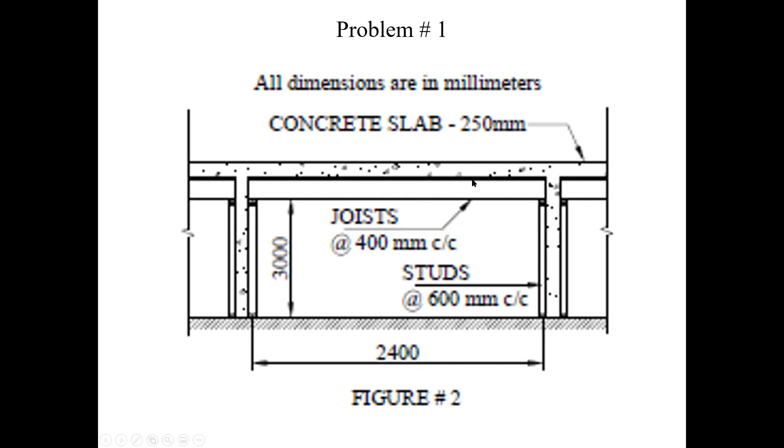Now for figure 2, determine the thickness of the plywood. Use COFI Form Plus plywood. The plywood will be placed perpendicular to the support, and the deflection is limited to L over 270.

Now guys, as far as deflection goes, if there's not going to be importance on the architectural appearance of your formwork, L over 270 seems to be an acceptable deflection. Otherwise, if you think the architect is going to want a nice unundulated surface, stick to L over 360. This way you'll be able to minimize the undulations or deflections caused by your formwork.

Provide the load that the plywood can support. What I'm saying here is that once you go to the table, tell me what it can actually support. Now, the walking load is 3.2 kPa.

This is a pretty good standard walking load that you would have when designing formwork. And like I said, if you're doing something residential where there's only going to be maybe 1 or 2 people on your formwork placing concrete for a small balcony, you can go down to a walking load of 1 kPa. It would still be acceptable.

Now determine the size of the joist and the bearing lengths using SPF number 1, number 2, because that's what joists usually come in. This is the most common grade that you'll find SPF in.

And as far as the studs go, I want you to use 2x4s, okay? You have to determine whether they can support the load based on the spacing shown there at 600 millimeters. If not, how do you modify the spacing? Well, once you know the PR value, you can work backwards and determine what spacing you need so that the PF value is less than your PR value.

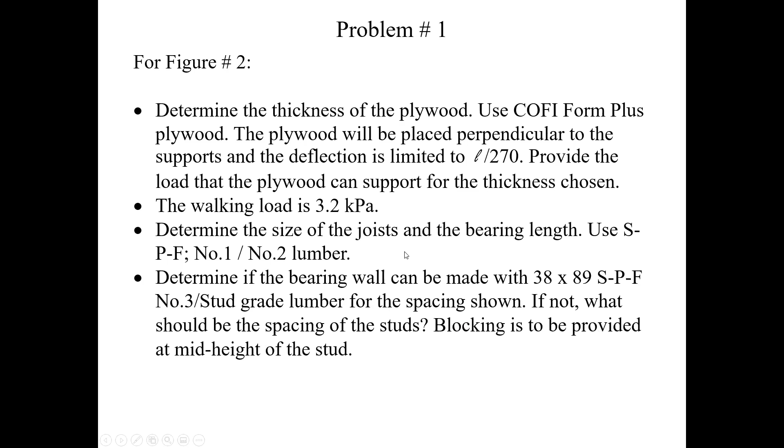Now, load on the plywood. Like I said, when doing plywood, concrete is to be considered a live load. The easiest way to calculate the pressure caused by the concrete is to take the unit weight of concrete, multiply it by the slab thickness, and that gives you the pressure the concrete will impose on your formwork.

And therefore, you take 23.6 times 0.25, I got 5.9 kPa just for the concrete, and I said that the walking load was 3.2. Therefore, I have a total live load that my formwork should be designed for, which is 9.1 kPa.

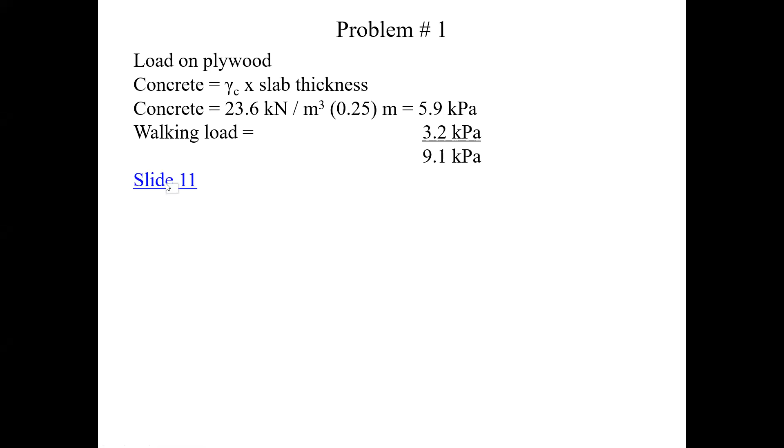So if you see here, plywood must be continuous over 2 supports or more. Supports are supposed to be 38 millimeters wide or larger. The design pressure is a specified load.

So when you come to this table, you use the specified load, not the factored load. A 1.5 live load factor was used to determine these values, so these already take into consideration a factor of safety of 1.5.

So if there happens to be a temporary overload when you're placing the concrete, it should account for that as you're doing it. Now, we said that it was L over 270 perpendicular to the supports, and this was the spacing of our joist.

And therefore we know that even if we use 12.5 millimeters, which to me is half an inch plywood, it would be sufficient to control the deflection that I need and to support the load. And therefore, like I said, contractors are going to typically buy 19 millimeter plywood and use it.

Good plywood, guys, believe it or not, if the guy takes the trouble of oiling it, in other words treating it and this and that, they can be reused up to 50 times.

So that's why they'll buy the 19 millimeter, in other words a 3/4 inch plywood, and use that. But if you know 12 is good, you definitely know that the 19 would be more than ample.

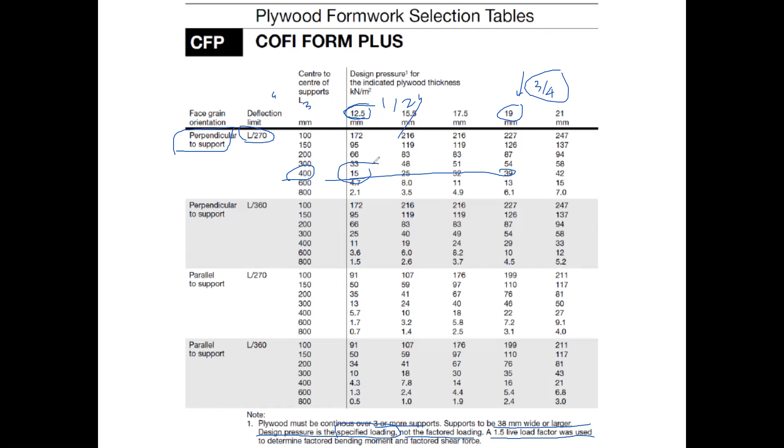So that's the only reason why I'm trying to let you know that what this table tells you is that if the guy decides to use something thicker, not a problem. If he wants to use something thinner, then it's a problem.

So last we viewed, I got 15 kPa, which is greater than my 9.1. Fantastic. Now, as far as the joist design goes, well, now I've got some dead load.

I have the weight of the joist and I have the weight of the plywood, so I have to take that into consideration. So therefore, the dead load for the plywood.

Now, last week, like I said, I was being very generous. I used 0.1 and 0.2. Here, I'm trying to be a little bit more accurate. I went into my wood book and I found that for a 1/2 inch plywood is 0.06 kPa.

And I took a joist spaced at every 300 and 400, and this is what the joist was. So therefore I ended up with 0.2. But if, like I said, if you use 0.10 and 0.2...

So if you overestimate your dead loads, you're not doing yourself any harm in terms of your design. You're only being that much safer. But if you want to be a little bit more accurate, of course, you can go to the dead load tables.

And get values that are a little bit closer to reality. It's up to you. You remember, you're designing, you're going to be responsible for the design at the end of the day. It's up to you how you want it, to what degree of accuracy that you want to make it at.

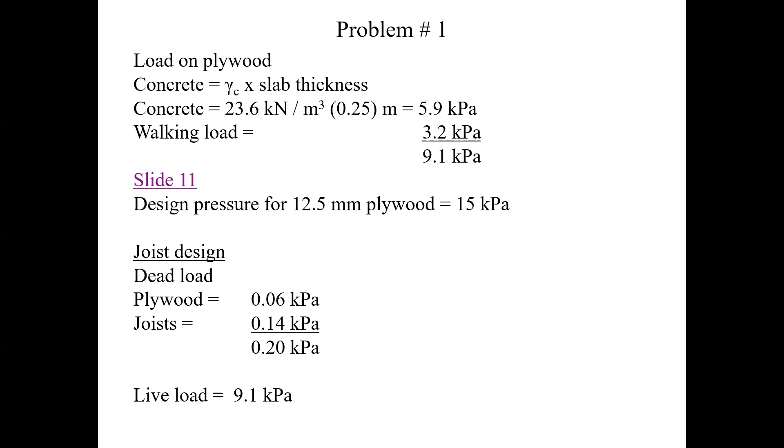And of course, our live load is what we calculated for our plywood. Now, here I know that my dead load is definitely not 10 times greater than my live load. So I will simply calculate the factored load for load combination number 2, whereby I take 1.25 times my dead load, 1.5 times my live load.

Of course, now I've got to factor my loads in order to design my joists. So I get a factored load of 13.9 kPa.

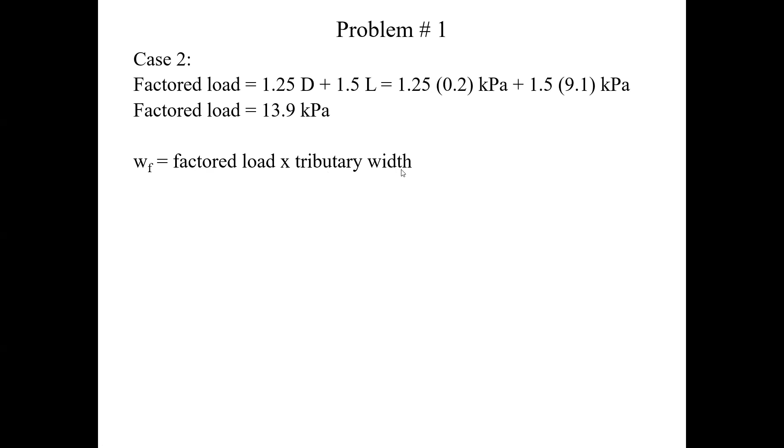And so once I have this, for deflection purposes, okay, I get my WF times my tributary width. And of course, I said that we're going to start with a spacing of 0.4 meters, and therefore WF is 5.56 kilonewtons per meter.

For deflection purposes, I take the live load unfactored of 9.1 times 0.4, and that's what I'm going to use to calculate my deflection criteria. In other words, the stiffness, the EI requirement for my joist. Now I calculate my MF, and like I said, this is basically a joist problem, nothing more than that. VF, and of course my EI.

Since I've limited the deflection for the plywood to L over 270, I will use the same deflection criteria for the joist, because it makes no sense to have the stiffness of one member being higher than the other. So I'll have this one equate to this one and put everything in terms of... I'm sorry, this is wrong, this is for steel.

Sir, if I use 0.3 for dead load, it doesn't make a huge difference there, but would I still be wrong? No. If you use 0.3, you'd be very right, you'd even be more right if it works. Because what you're doing is you're actually overestimating the dead load. And what's good about that is that if the contractor decides to use 3/4 inch plywood instead of 1/2 inch plywood, in other words 19 millimeters, you've already accounted for that in your design. I think that's a smart thing to do. I'm just trying to show you that you can go to the two extremes. You can be over generous, plus the load is not that heavy, or you can be a little bit more accurate.

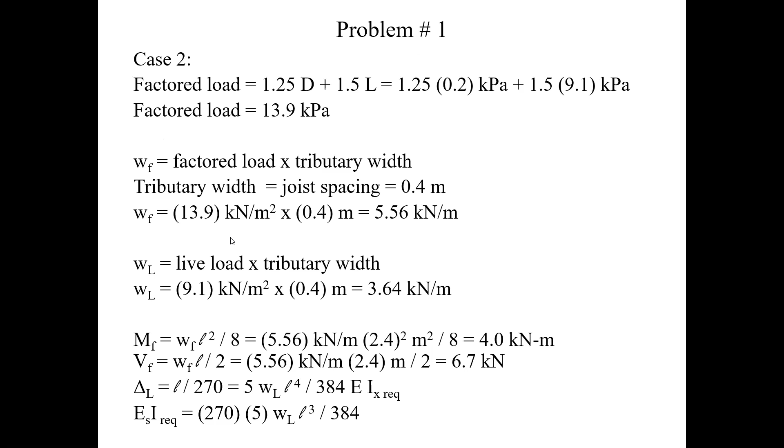Okay, that's it, so now EI required - like I said, this is just a typo here. So now I'm going to calculate the EI required and end up getting 177 times 10 to the 9th Newton millimeter squared. Now, of course, I forgot what my MF value is - oh yeah, I'm not there yet because I'm going to be modifying.

So here I'm going to take advantage of the fact that my KD is not 1 and my KH is not 1, because I'll be looking at the values of single members. And since I know I'm going to have at least 3 members not spaced more than 600 millimeters apart, I can take the KH for case number 1, which gives me a value of 1.1. And since formwork is considered a short-term load, in other words after 7 days, in theory the concrete is going to be supporting itself, it's not going to be permanently supported by my structure, I can take the KD equal to 1.15. Therefore, I'll take advantage of these two factors, which will help me reduce my MF value, and I can go find a slightly smaller MR value in the table.

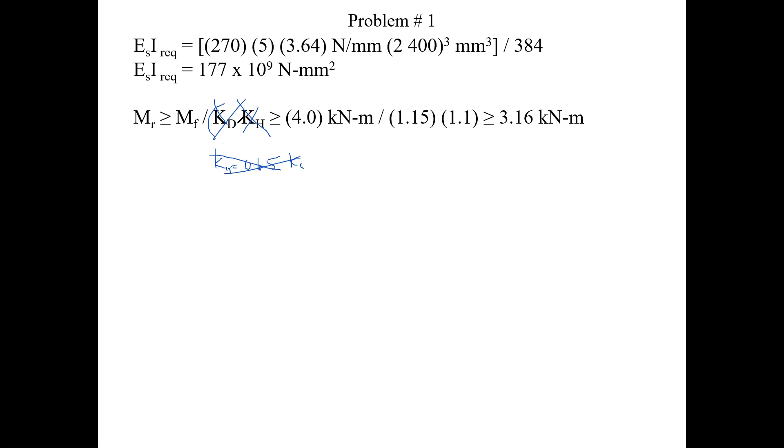So that's where it penalizes you. Now, if you don't do this, you're going to be overestimating your formwork. But where KD is not 1 - in other words where KD is 0.65, and KH is not, where all the values are going to be less than 1 - then you should take advantage. You should make sure you modify them correctly, because with the tables, you should go through that checklist and make sure you fix your values according to the right factors that will be affecting the resistance of your wood.

Now the same thing for VF, and of course for the EI - this is only affected by the moisture content and the treatment factors, therefore that stays the same. I don't have to do anything there.

And therefore now I have 3.16, 5.3, and 177. So when I go to the joist tables, the only thing I have to remember is that I am definitely not here. And that's because even though I got joists and even though I have plywood over it, I don't have the right nailing requirement.

And therefore I will never use these values for formwork. The only thing that stays the same regardless of whether it's a single member, so I never use this for formwork. I always use a single member because of the nailing requirements for case 2. And of course I'm using SPF, number 1, number 2. So I see here that a 38 by 235 gives me 4.09.

So Nicola, you probably had an MR value very, very close to what I got, right? Your MF value is very close to what we got? Exactly, yeah, I got MF equals 4.04. Exactly, so therefore it would still work, right? Yeah, okay, so that's good.

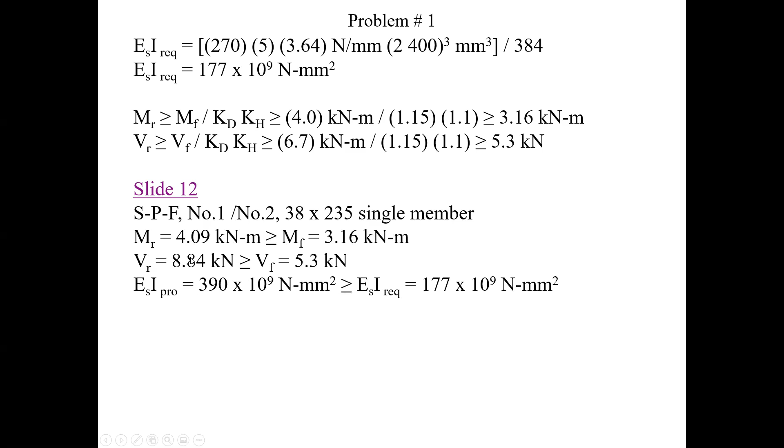And as far as the bearing lengths go, this is where you get the value of Q, the small value of QR. And again, the checklist, if you want, you can take advantage of the fact that you have a load duration that is not standard, and if you want it still applies. And the KD is 1.15, and therefore you can calculate the bearing length.

So here we go. So therefore, I will take advantage of the fact that I have a short-term load, okay? And therefore it will slightly reduce by 15% the LB required down to 36.2.

And of course, if I'm building a wall here that's going to have a top plate with my joists like this, okay, I know I'm going to have 89 here. So if the guy puts the joist all the way back there, the LB provided is definitely going to be more than 36, and I have no problem. The only problem is if the guy decides to sit very close to the edge of the wall, which I don't like because it's going to cause eccentricity for my studs and so on.

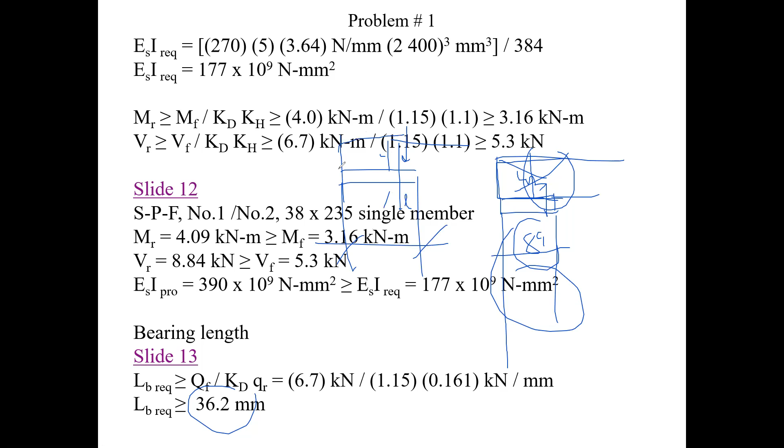So I would tell him, no, I'm sorry, you're going to have to go all the way to the back, so it's not just for the LB. If the guy ever decides to put his stud right at the edge, don't just worry about LB here, also worry about the eccentricity that it causes to your stud. That's even more important than LB. So I would tell them, make sure that the thing is sitting all the way to the back of that wall that's supporting my formwork.

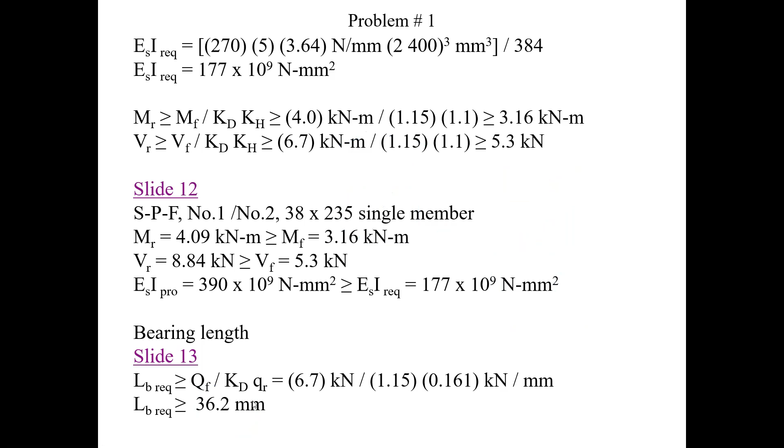Okay, so there is the LB required. So I know that as long as the carpenter who's building the formwork puts his stud all the way to the back of the wall, I'm going to have 89, so it's ample, not a problem. Now, as far as the bearing wall goes, well, here we go.

We have 38 by 89 at every 600. Now the length is 3000, okay, and blocking at mid-height, so therefore the LD is going to be 3,000. The LB will be 1,500 because I'm blocking the B, okay. So therefore this was my factored load.

That doesn't change for the wall. And of course the factored load times the tributary area gives me my PF. So therefore, half the span times the stud spacing is what I have.

I'll write this down so you guys can see it, it's better that you actually see how this is done rather than just worry about it.

Here is my span of 2,400. My joists are running this way and my wall is here, so it stands to reason that half the load goes there, half goes there. Each stud will be supporting a load, so if I calculate the tributary width of each stud, that gives me my tributary area. That's the way you should really be seeing it, and this is how you would write it out so people could understand what you're doing.

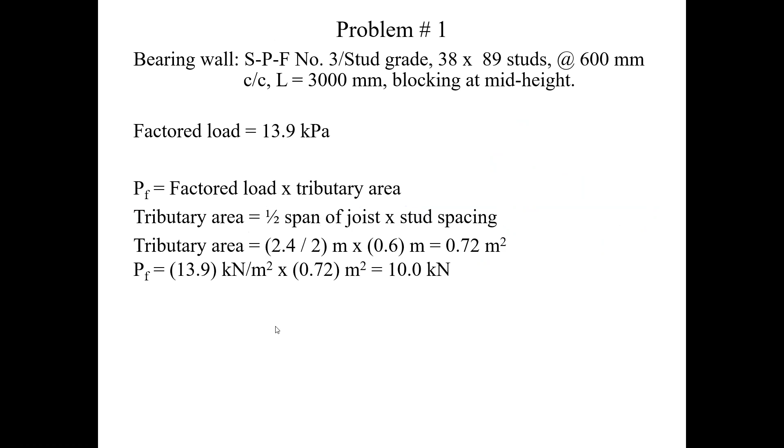So 2.4 divided by 2 times 0.6, giving me 0.72 square meters for each stud. My PF value is 10 kilonewtons, so now I have to make sure my PR will exceed 10 kilonewtons, and of course it won't. But I did that purposely so you guys can start developing a certain understanding.

Now here again, the LD is 3000 because nothing's supporting the D dimension, but we blocked the B dimension, so the LB drops down to 1500. By checking the slenderness, we determine which one is going to govern, and the higher slenderness is the one that governs. Here I have 33.7, here I have 39.5, so the B will govern in this case.

Guys, be careful, this is the limit. If I would not put any blocking here, this value would be twice that, in other words I'd end up with almost 80. That should be a real big red flag that something is wrong. As soon as you exceed that 50, something is definitely wrong. That's why they give you these limits, because after that it is so slender that it almost has absolutely no resistance. Keep this 50 in mind.

So now I know it's the B dimension that governs, not the D, so I'll calculate everything with regards to PRB and not PRD. That's what's nice about checking the slenderness. So I'll use PRB, now phi FCAK.

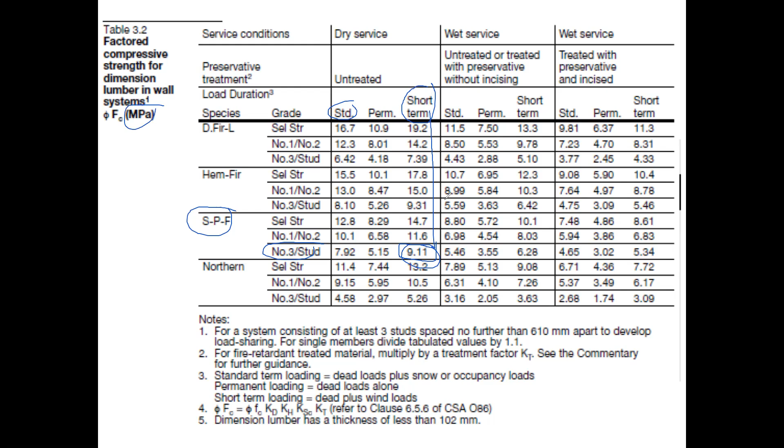So phi FC, this is where I get the value. What I'm going to do when I go to the table is first make sure I'm in the right species, the right grade. But since I'm doing some form work here, I'll take advantage of that and use a slightly higher value of phi FC. If you were doing a floor, you'd use a standard value, but if it has a permanent load, you can adjust. So I'll take advantage of the fact that I am doing short term, and don't forget the units are in MPa, so that's the value I'll use for phi FC.

So 9.11 MPa. Now the area, the cross-sectional area of a 2x4 is 38 by 89. And now the size factor, again you cannot exceed 1.3, that's the limit of the size factor.

So here again, I take the unbraced length with respect to the B dimension, and I end up with a value of 1.52, which I do not use. Since I cannot exceed 1.3, the maximum size factor I can have is 1.3.

I don't know if you guys remember this, but they found that if I take a 2x4 and a 2x12, even if it's the same species, the same grade, and even cut from the same tree, the smaller the member, the more resistance it had. They worked this out through a lot of testing, and that's how they came up with this formula. It's interesting that it's not in proportion - you might think it's just a question of size, but it's not only the size, it's also that the smaller the size, the stronger it gets.

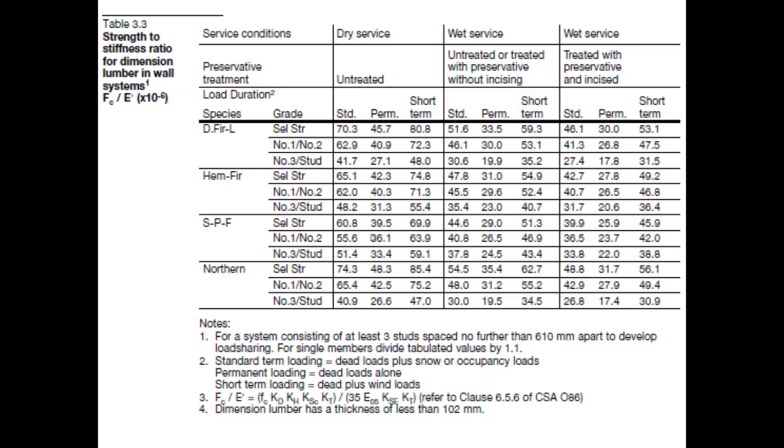Oops, I shouldn't have done that. Of course, now I'm going to get... okay, so I get 59.1. Sorry, I apologize. Now, it's important that you calculate this correctly because it gets used again here in this formula.

So therefore, if you make a mistake here, it's going to get carried over into this formula here. So be very careful about that.

So now, you take all of this. This you've calculated from the very beginning, the slenderness ratio. This is what determined which one governed. This was your slenderness ratio. And of course, your size factor, the ratio of FC over E prime, add it to 1, take the inverse, and hopefully it will be less than 1.

Like I said, 0.174. This seems very reasonable because my slenderness ratio is around 40, and that makes sense to me. I'm pretty sure if we had a slenderness ratio around 50, you'll see that you'll start getting very close to 0.1. And that tells me, yeah, that makes sense. That seems to be a good value.

Guys, if ever you're doing this in real life, do this calculation in your calculator, store it in the memory, redo the calculation, and then subtract the memory. If you get 0, go on. Always do your calculations twice. I still do that to this day. That's good practice, and it's very embarrassing if you make a mistake here, because the mistake just gets carried all the way to the end of your final choices or your final design. So don't ever just do it once.

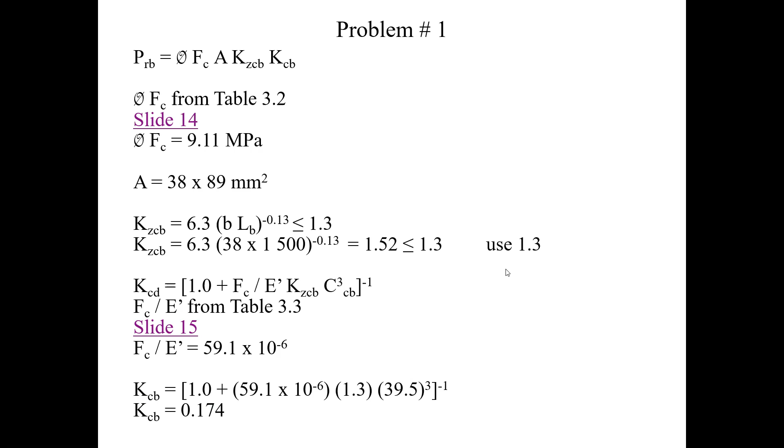So now I've got all my values, and of course I put them into the equation, and then here, this is in MPa, I have to convert this to kilonewtons. Therefore, I basically divide by 1,000.

And I see that my PR value is 6.97, which is no good. So, not a problem. Instead of making bigger studs, why don't I just put them closer together? Now, how much closer? Well, this is just mathematics, okay?

Basically, I know that the PF is a factored load times my tributary area. So all I've got to do is adjust my tributary area. I can't play with the loads, that's fixed. The only thing I can play with is my tributary area, and I can't play with the span. The only thing I can play with is the spacing of my studs, to minimize the tributary area so that the PR value exceeds my PF value.

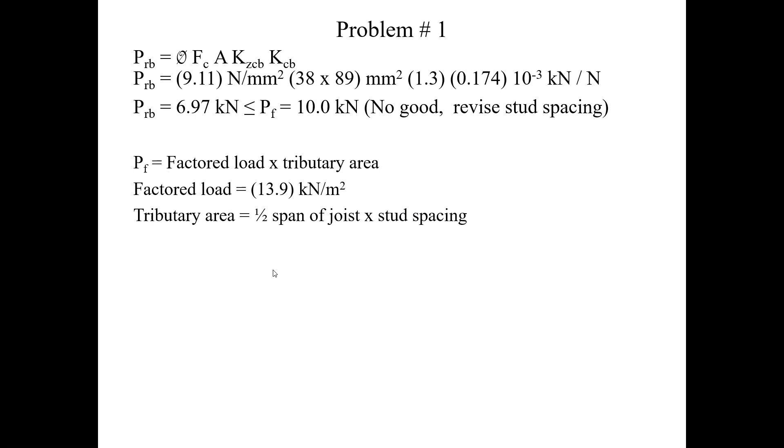So basically, the span stays the same. The stud spacing becomes a variable, and I just want to make sure that when I put it in this equation, the PF value is less than 6.97. As long as it's less than 6.97, it will be correct. And I end up getting 0.4 meters.

And of course, I can specify 0.4 meters, but why do that when you can specify 16 inches, and space them at every 400? If I put my spacing at 400, I'll get a PF value a little bit less than 6.97. And therefore I tell the carpenters, put the studs at every 16 inches on center. It should be okay, as long as they put the blocking at mid-height to laterally support the stud.

Guys, when you're doing formwork, keep in mind whatever you're putting at the bottom here, okay? If you want to refer to that, this is called a mud plate. Because it's basically usually sitting in the mud, and it's a plate that helps to support. So if you're ever referring to that bottom piece, it's called a mud plate. That's what they refer to it as in formwork.

And that's it. So now you know that you're good to go. And as long as you can do that, that's it. So does anybody have any questions?

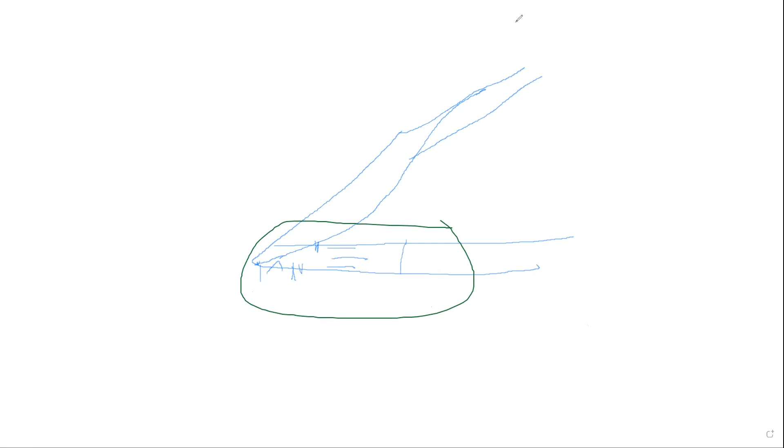But if you're gonna do it with AutoCAD, I think last week I actually very quickly drew the truss, and then I came up and was able to determine this, right? What I said was, you know, with AutoCAD, the nice thing is it does all the calculations for you. You just have to give it the command.

So for example, if I take this member here, I'm going to put it up here so we can all see it. Let me clear this. So with AutoCAD, what you can do, okay, I'm going to change color so you can see this. So with AutoCAD, what I would do is I would draw a line here.

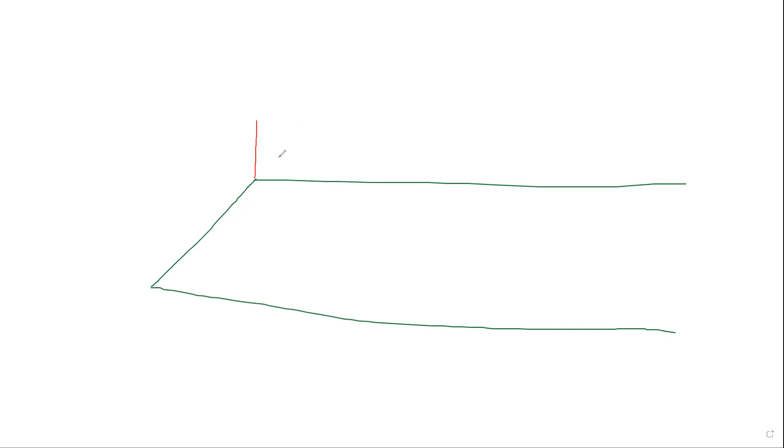Okay Ryan, and then just to make it easy, I'd make sure the line touches here. I know that it has to have a perpendicular distance of 40 millimeters. It's 39 minimum, but 40. So what I would do with AutoCAD is draw a line here and say offset, take the offset command.

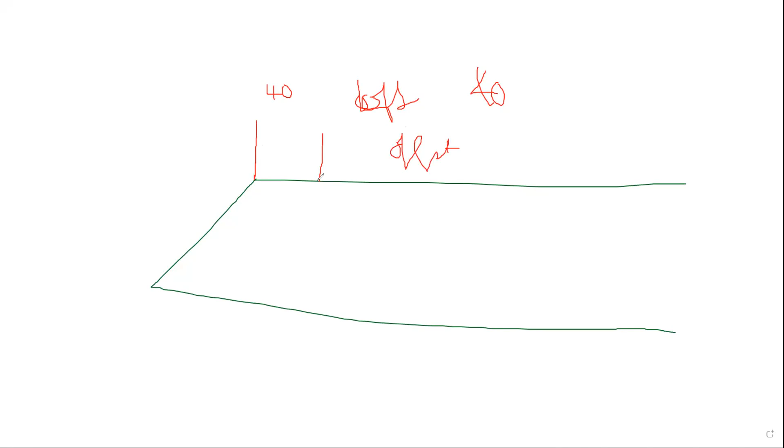Offset, and then I would say 40 millimeters. And then I would pick this and point here and AutoCAD would put it there. Then with AutoCAD, what I would do is say offset, and now I wouldn't give it a distance, I would say through.

With AutoCAD, you can actually pick a point and it will go through that point. So you would pick this line here, and then pick this endpoint, and AutoCAD will put it right there for you. Because if you say 40 millimeters, it's going to offset 40 millimeters perpendicular like this instead of 40 millimeters perpendicular like that. You follow what I'm saying?

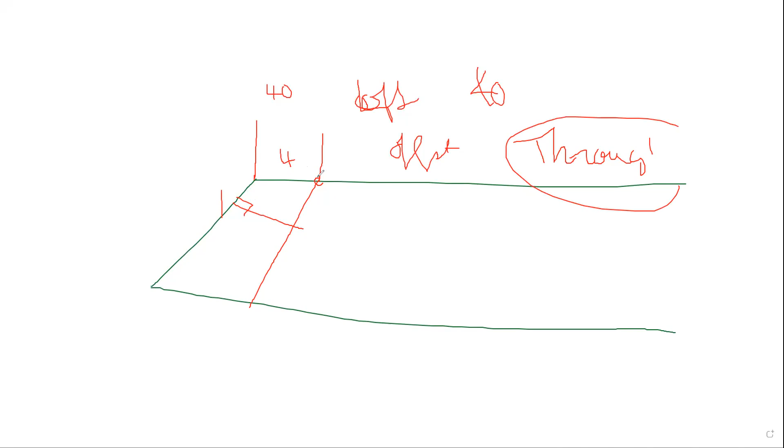Yeah, so by saying through, AutoCAD will go through that point. Now, what you can do is then after that, you take this and offset it. I think we said we should leave 60 after that, right? So then you can offset this to 60 here, okay?

So you're always going to make this, and then after that you can do another through, you understand? And then, like if you saw what I did last week, once I got this point here, I said copy, copy this, start with this point here and go to that point there, go to that point there, and I was able to just keep copying those all the way across until I ended up with the number of spaces I needed.

You understand? Did you record that last week? I think so, but if you want, we can do it again. No, it's okay, you can just look at the video. So the thing is, Rena, for me, AutoCAD is a great tool.

You understand? I like to use that tool and try to maximize how I can get the most out of it. If you didn't realize that you could use this through command with AutoCAD, you would never have thought of that. You know what I mean?

So the same thing here, for example, well here we don't have to do it, but for example this one. Once you determine how many times you have to repeat this pattern in order to get the number of nails you want, with AutoCAD I would just ask it for that distance, and then bring it up to a multiple of 10. That would be the size of my gusset plate.

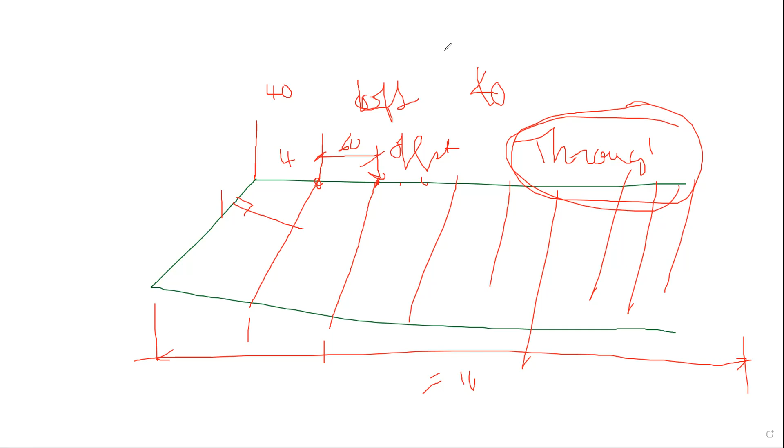If you're there, that means you're pretty well finished your project, which is great. There's only 2 weeks left. I don't know if you guys noticed, but I put the project on the assignment sheet. Keep in mind that if it doesn't come in by the time I have on that sheet, you will lose 50%. That means you fail the project, because if you lose 50%, you're at 50%, you don't even have 60, so you failed.

We also send our AutoCAD file in the same, but through LEA, you understand, because I want to keep the PDF in one folder. I want to keep all your drawings. First of all, you're only going to have hopefully one AutoCAD file, because you're just going to copy and put everything on one sheet, like I showed you. So I'm basically going to be getting one AutoCAD drawing from you guys.

Anton, go ahead. Yes sir, I have a question. Since the last exam we did built-up columns, bearing wall, and lintels. So for this exam we only have nails and formworks? Isn't that nice? Perfect, I just wanted to clarify that.

Hold on, let me just see if I have... yeah, as a matter of fact, yeah. If you want, I can send you the exam the day before. How's that? Does that sound good? Are you joking? Of course I'm joking, because the day before is a strike, I'm not allowed to do it. So now you know why I'm saying that, because it's a strike. I'm just kidding.

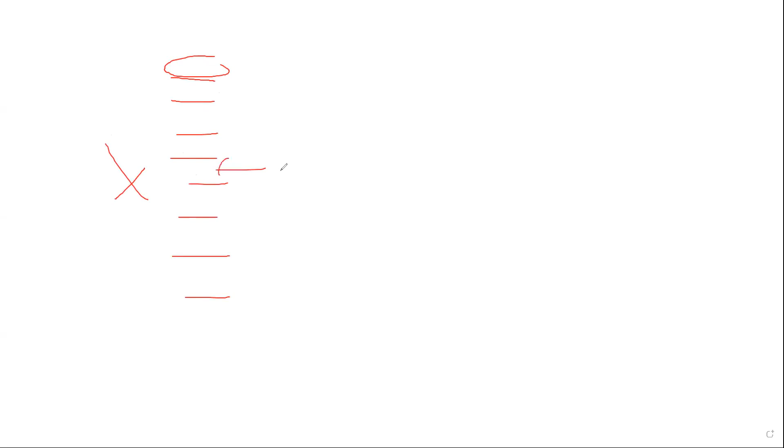Okay, so that's clear for everybody. Make sure that it's in the order that I specify on that sheet, because I don't want to have to go look for information. If I expect the information to be there and it's not, I will start deducting marks. If I find it somewhere else, I will disregard it and still deduct that mark from your project.

I shouldn't need a roadmap to discover where to look for the information. The design brief follows the chronological order as if you were actually designing the project, and I expect the calculations to be in the same order. At the very end, once all your calculations are done, I should be able to find all your drawings, and those should also be in sequential order.

Those of you that have been keeping up on a week-to-week basis, this is when you're going to appreciate the fact that you put in the time way back when, because this is where it pays off - the last 2 weeks are horrendous. I don't know if you guys are feeling the crunch right now, because that's the biggest complaint I hear every winter.

I've been keeping up and I'm still stressed. At least you're a little less stressed than if you wouldn't have been keeping up. Trust me. I believe I've had people drop the course because they couldn't finish the project. That's unfortunate, coming so far yet so far again.

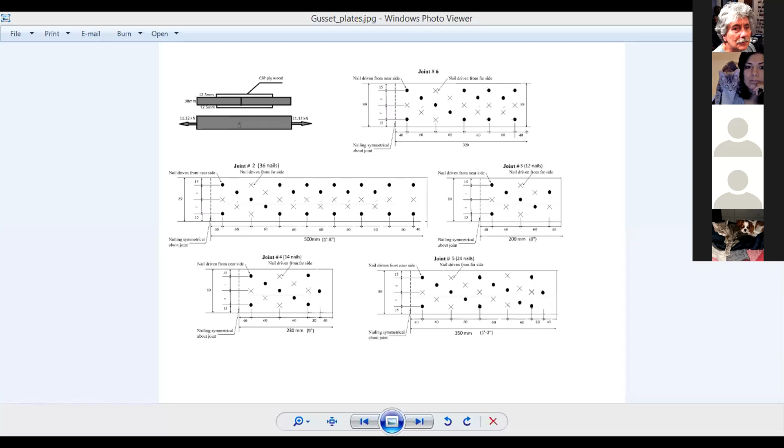Did you do it on AutoCAD? Not really, I haven't gotten this far with AutoCAD, I just made the design here. You're going through all that trouble? Yeah, why?

No, just for me, the thing is, the gusset plate, it's fine showing here, but when I try to picture it on the truss itself I'm not sure how it's done. I'll give you an example, I have the same problem. That's why I did almost the same thing as you did, and I had the same problem.

All I want to see on your drawings, for example, you've determined here you need 500 millimeters. Is that it? Yeah, 1 foot 8, for 36 nails. So if you're doing your drawings in imperial, all I want you to do is show me that the length of that gusset plate is 3 feet. 8 and 8 is 16, 3 feet 4 inches, that's it.

You understand? If we look, I haven't opened up a drawing, but why is it going to be 3 feet? Well, because you're saying that half the gusset plate is 1 foot 8 inches. If you take the full length of the gusset plate, it would be twice that.

Okay, yeah, but this is for joint 2, that's the part I'm not getting actually. This is for joint 2. I wish I had... this is joint number 3 that you worked this out. Which sheet? In other words, this was for joint number 3, right, that you worked out the spacing here, is that it?

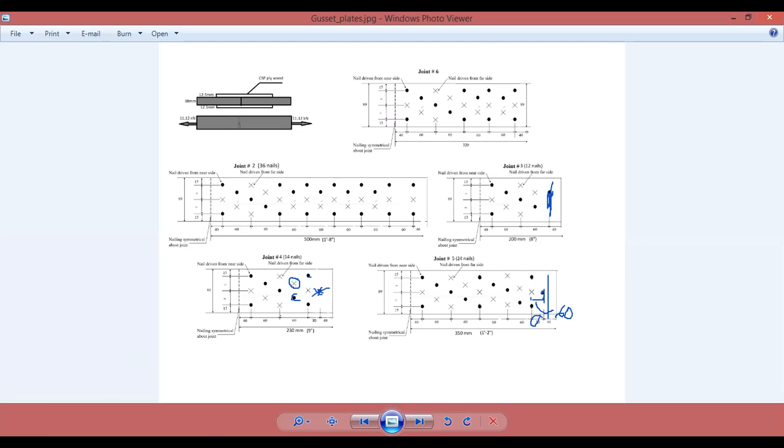Understand? So all I'm saying is right now you've got 9 inches here — I would say that becomes 10 inches. That's all I'm saying, because you cannot do this, you're not allowed putting 2 nails in line. Do you understand? The C distance is this, Norman. This is that A distance we were talking about. Now if you maintain that distance, you're allowed to stagger in between, but they're not in line. That's what they mean by staggering.

See, the distance between this one and this one is more than 52. The distance between the staggered nails, you're still maintaining that minimum A distance.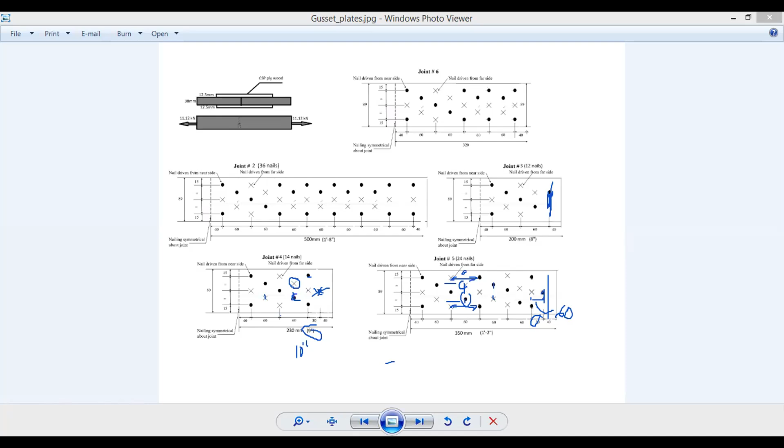I don't know if you understand what I'm saying. No, I do understand, but I thought as long as the problem... I thought I was very clear on that. You have to understand the whole concept of what A, B, C, D stands for - it's the direction of the grain and where the nails are with respect to that grain.

Okay, so this nail here, and this nail here - did somebody erase my thing? Can you see me draw 2 circles here? How come they keep... I'm trying to. No, we can't see it full. Okay, I can reopen it if you want. So you're gonna share? Well, I can go get the drawing. It's gonna take a while, but I can go find it.

So you worked out all the distances, right? Like I said, there's a little glitch, but don't worry about that, Nermin. You understand?

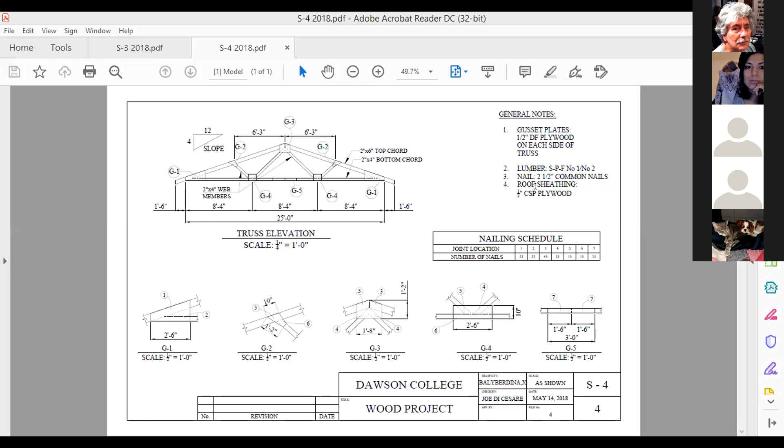Are you sharing your drawing? There, right now. Okay, here it is. So what you're saying, can I annotate? Let me annotate, okay?

I'm annotating now. So on what you showed me before, what was the distance you had here? It was 500 milli, so... give it to me - it's 1 foot 8 inches. And how many nails did you put in there? 36. Okay, so you calculated 1 foot 8 inches from there to there.

You understand? Okay, so what you're going to do is on your drawing, you're gonna offset 1 foot 8 inches, and then measure from there to there and round it off to the closest inch. Okay, for this joint I get it. And now the joint - as you call it the bottom - let's look at joint number 3.

This is joint number 3 here. Okay, Nermin, that's joint number 3. According to your calculation, what was the distance that you needed to put the number of nails?

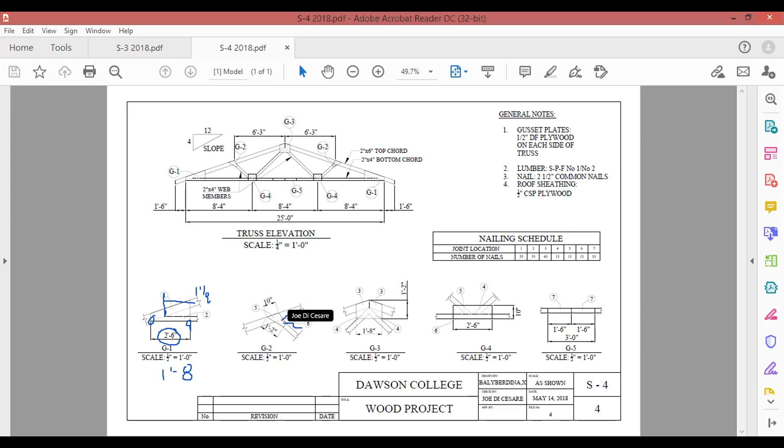12. Yeah, it was 12 nails, but it's coming to 8 inches. So what you're saying is that from this point here to that, you draw a line and offset it 8 inches, and that would give you that line there. You understand? Then you can determine the size of your gusset plate.

So you've already worked out your dimensions, Nermin. You understand? Okay, my problem - let me blow this up for you.

See, you drew it straight like this, and you worked out your nails. You understand? Now I'm going to take this member here, and draw it with the same angle that it's supposed to be in the truss.

You understand? So what you did, you calculated if it was straight from here, and you needed 8 inches to put all those nails. So you're saying that from that point there to that point there, you need 8 inches. You understand? And then you draw a line perpendicular to that, and you'll be able to dimension what that is.

Okay, now my problem - let's go. I'm just showing you how easy this is. Now you've worked out the hardest part. You understand? Now you're just going to take AutoCAD and simplify your life.

Now up here, what joint was this? It was... these are joint 4. Okay, so on your joint 4, what distance did you calculate to put all the nails that you needed? I have 9 inches. Okay, let me blow this up here.

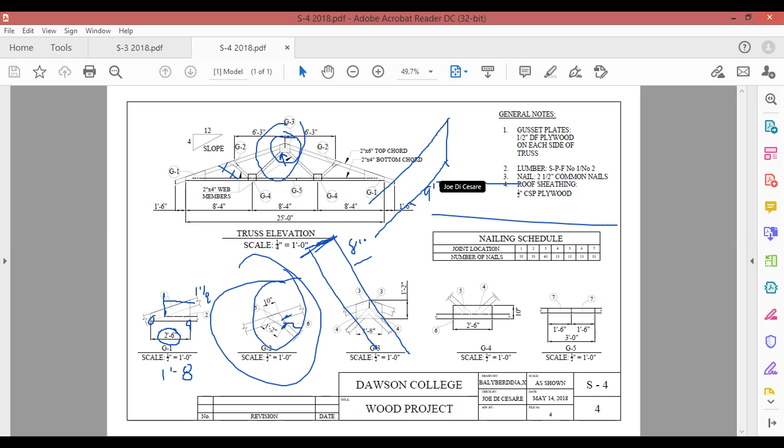Yeah, okay, so on your AutoCAD drawing, you take a line here, you offset it 9 inches, and then you just draw a nice straight line, and you go up, and you've got your gusset plate. My God, you've got all the information right there.

So I'm gonna, you understand? Like you're drawing everything straight like this, and you're calculating what space you need, right? Well, then when you get to your drawing, this is the straight part.

You understand, that you have on the other drawing? That's why I wanted to show you. If you could have left both drawings, I could show you how you relate that to that. I don't know how to put both of them next to each other.

Well, you press the... do you have a Microsoft key on your keyboard? Are you using Windows 10? Do you have a Microsoft key on your keyboard? This one - this is an ancient laptop that I have. Oh, it's a laptop, okay. So okay, no, okay, you're using a laptop.

Okay, but you understand, Nermin, what you've done is that you've worked out, for example, even this looks like this one here - this looks like it's like this. You understand, it goes like this, it goes like that. What you did is you put everything straight like this, and you worked out what the spacing was, right?

So when you come to this joint here, you would be starting from here, and then you would go and offset that way, and that would be the straight distance that you worked out, and then you just let AutoCAD do the rest of the calculations for you.

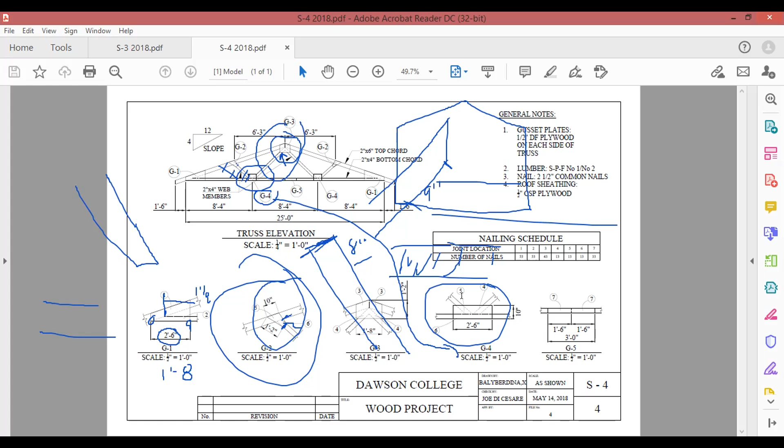Yeah, pardon? I saw the lab, I was there for last lab when you did the first drawing and how you designed it. So what I'm saying is that for this joint here, right?

Can I clear the drawing? Okay, so let me show you, let me show you on my whiteboard how I would, based on the information that you have - you want me to stop there? I'm going to show you on the whiteboard how I would do it once you have that information. Okay, so let me show you.

So if I was in AutoCAD right now, okay, this is the bottom chord here, right? And I don't remember exactly, did you put the members this way for the bottom chord? Is that how you did it? Yeah, yeah. Okay, so look, I'm going to change color so you can see what you're doing.

Okay, I just change color, I'll do it in blue. Okay, so right now, what you did is that you took a straight piece of wood like this, right? And you calculated, for example, my edge distance here, and you calculated how far I would need to have all those nails in that space.

You understand what you did? Yeah, yeah, of course. That's what you did. And then you said that for this joint here, you had 9 inches - is that what you had?

Yeah, okay, so what you're saying is that from here, okay, if I take the same straight piece of wood, just in your mind, superimpose it like this - isn't that what you're doing?

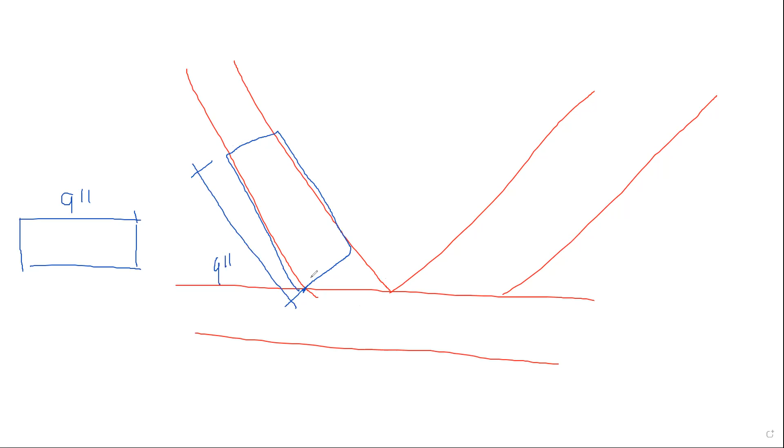Yes. So if this is the case, what I would do is with my gusset plate, I would go down straight, make that at an angle there, go straight, make that at an angle, and make it go straight. Isn't that a nicer gusset plate?

Yeah, absolutely. Of course it's gonna be like that because the next drawing you've worked out the worst part. With that information that you had, if you were in your AutoCAD drawing, it would take you about 2 minutes and you'd have all the sizes of your gusset plates.

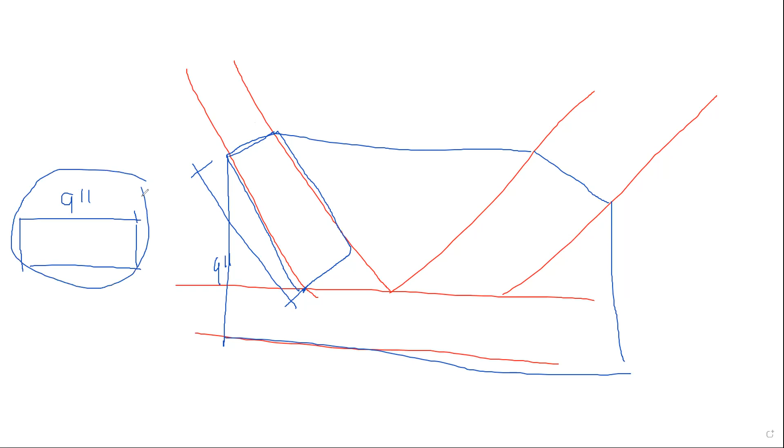Okay, so you got what I'm saying? Like what you did here, just in your mind, superimpose it on the member as if it's straight, and then from there work out how you're gonna make sure that you maintain whatever you worked out there.

Do our gusset plates have to be like this? What's your question? If the gusset plates have to have this shape in particular, because I was looking on the internet and there were different shapes for gusset plates.

Rena, there's not one right answer. What's wrong is if there's not enough space in here to put the nails. Okay, understand? So if you want to make this pointy, or cut this at an angle, it's up to you. But what's wrong is if there's not enough space here to put the nails. That would be wrong.

Here there would be ample space, trust me. By the time you do this, there would be ample room to put the nails you need, from here to here. I'm pretty sure this will be ample space to put the nails needed from that one and that one. But this, to me, is a very nice, clean gusset plate.

See what she did is she worked all her spacing based on the members being straight. I'm just trying to show her how you take that straight member and superimpose it here, and then take whatever you worked out there and do the rest on AutoCAD, letting AutoCAD give you the dimensions. You understand?

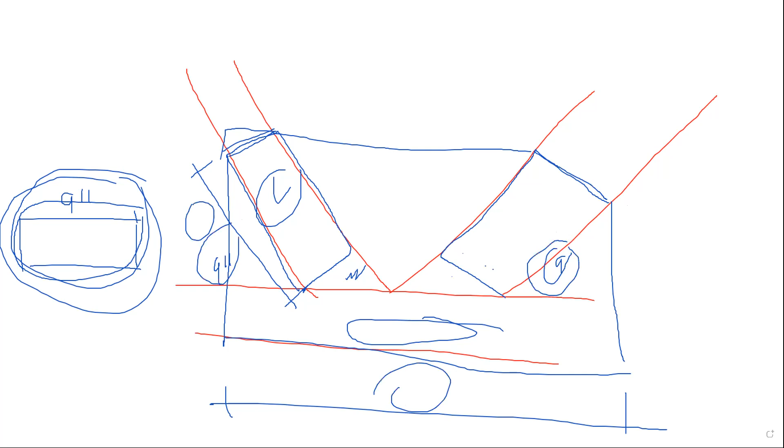So that's what I'm saying. If you don't do it on paper, you put your nails, do the offset, and then find out where it goes, and you can draw it on AutoCAD. But she's already done this manually, so she already knows what these dimensions have to be. So I'm glad it's clearer now, Nermin, you understand?

Yeah, thank you so much. Okay, so you were just having trouble relating how I'm doing everything straight, and how to relate it to something that's at an angle, right?

Yeah, especially when you have, for the bottom one, three different joints at the same point. So I wasn't sure how to put the whole thing in one. I superimposed a straight one right on my truss drawing, and from there I simply draw out my gusset plate.

You understand? Yeah, yeah, and you worked out the worst part. You know, that's it. So, okay, but it's fun. It's nice, fun, right? It's fun when you get it. Okay, so that's it, there you go.

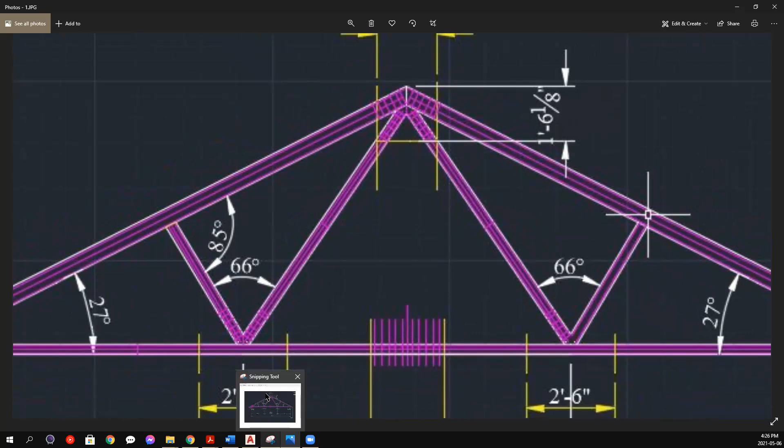Number one, let me annotate. Now Omar, if you understand what that diagram is saying, you'll understand how to relate it to your AutoCAD drawing. So for example, now I'm going to go back to the table. On that table, you had dimension A, dimension B, dimension C, dimension D.

Now, in that table, the A dimension referred to the spacing of your nails parallel to the grain. You understand? So if this is my 2x4 here, and my grain is definitely going like this, okay?

If I put a nail there, and I put another one parallel to it, I have to maintain that distance of, well, 52, but we're using 60. Do you understand?

So what I'm saying is that now with AutoCAD, what you do is if I determine that line here and I offset it, it's going to be exactly 60. So I'm respecting the A. You understand?

But that's what I want you to understand, like in AutoCAD, when you offset 60 millimeters, what you're doing is respecting that 52 millimeters when the two nails are in the same row.

I understand, oh okay, I see that. Okay, but my problem is I cannot, I'm right at the bottom here, I can't get a perpendicular line like to start with to offset it.

You can, I'll show you, like for one example here, second, let me share.

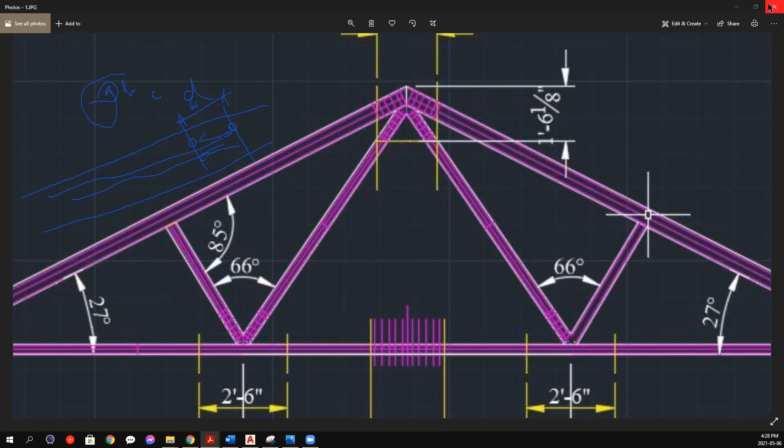Share me your AutoCAD drawing. Let me open it, one second. Can I share mine? Well, share, I don't care as long as I have an AutoCAD. Because if I open up my AutoCAD drawing, we'll probably take about 50 seconds.

Okay, so now I'm going to have to ask for a remote request. Okay, there. Do you see my cursor moving? Yeah, I see it. Okay, so Omar, first of all, let me zoom in and let me pan over.

Okay, now I don't know why your lines aren't touching here, but... this is my draft, so I haven't fixed that. Okay, because what I wanted to do is show, so we're, for example, extend.

Okay, so Omar, you want to see how you draw a line perpendicular? You say line, you start from that point there, and then you go. Make sure the O-snaps are on, and make sure the perpendicular is on.

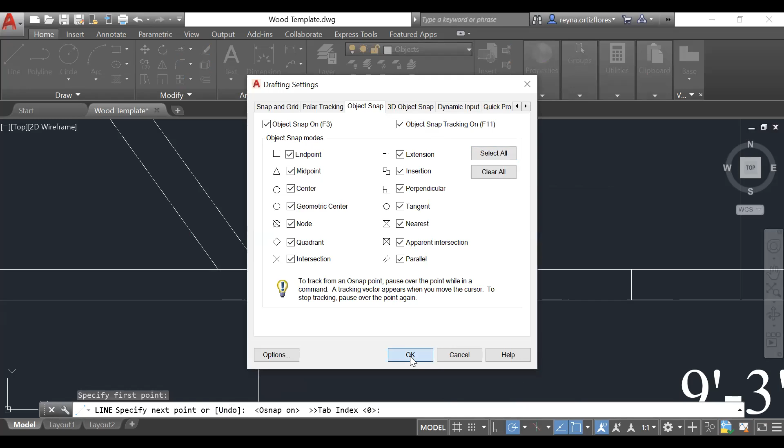Select all, this is the first thing you guys do, make sure all your O-snaps are on. I don't know how you guys work without this. I didn't even know that existed, there's perpendicular, Omar.

And now I say offset 40 for my edge distance, right? Sir, it's not, this is inches. Oh yeah, it's true, okay so in other words it's 40. Well, 40 divided by... okay, so this is inches.

You're right, so in other words, write 40 inches and it will do it? No, because this is in inches and I'm doing millimeters. 40 divided by 25.4 equals 1.57. Okay, so offset 1.57. Okay, so yeah, thank you for reminding me about that, Omar.

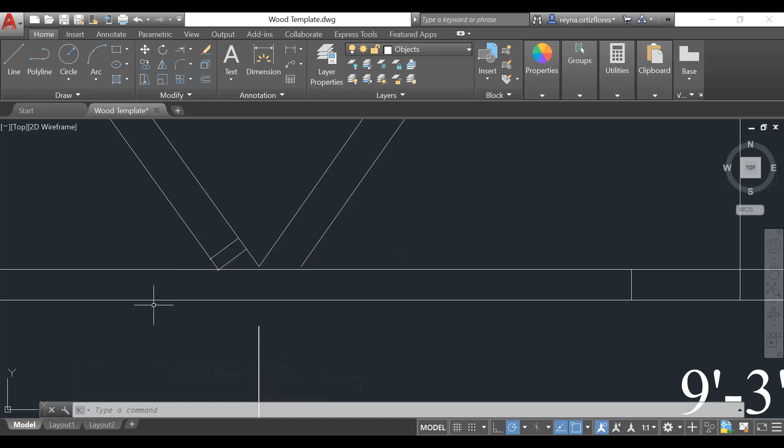So there's your edge distance, and then the other one we said was 60, right? 60 divided by 25.4 equals 2.36. So offset 2.36, and then, okay.

So Omar, you see how you get your perpendicular distances? And then you keep going. Like I have 3 nails, and then here I have 5 nails, so I'm at 8, 13, and you keep going until you reach the number of nails you need, and then you offset another 40 millimeters. You understand? And that's going to be the size of your gusset plate.

Wait, sir, can you just redo that step? Where did you connect? Where did you start off from? The corner? I started right here, where I need a minimum end distance of 40 millimeters. Yeah, exactly. And then what I did, I took 40 millimeters divided by 25.4. 40 divided by 25.4, because this is in inches, it's 1.57. So then I did offset 1.57, that's 40 millimeters. Then it's supposed to be 60 millimeters.

So then I understand. And then, because the problem is my truss doesn't come down all the way to the member like that. Why not? If I can annotate here, these two don't touch the bottom over here. Why not? Because I followed the video and they come down like this, and there's a space between here. These come down like this though for sure.

So in other words, what you're saying is that it makes no difference, Adriano, whether you want to draw them like this, okay, or you want to draw them mitered. It's the same thing. I take them both to be correct. Don't get me wrong, okay?

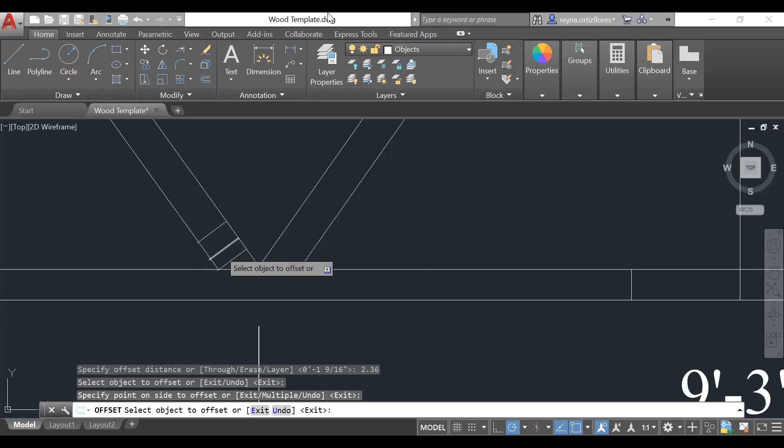So now, let me annotate here, okay? So like in your case, what you're saying is that you have one member coming like this, it's mitered, and it goes like this, and then the other one goes like that, right? Do you agree? Is that what you're saying? Or I'm sorry, no, I drew the mirror. Sorry, let me. No, I was getting confused because I think I made a mistake on one of the truss. That's why the perpendicular doesn't. What you're saying is that, like, in your case, you have.

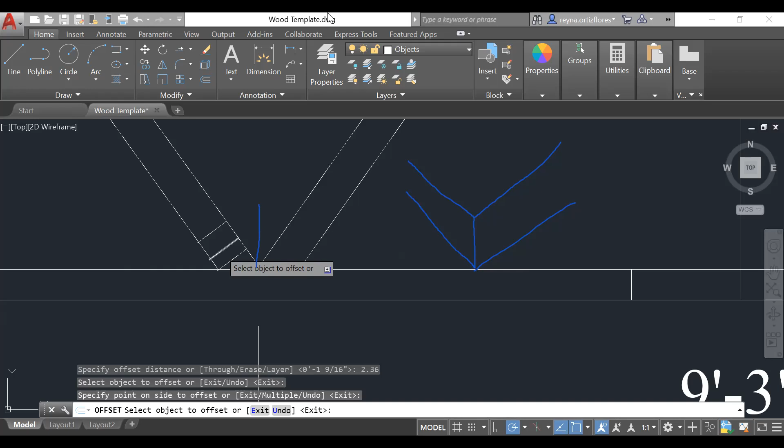Sir, can I share my screen and show you what he means? Yeah, go ahead. Please, Reyna. Let's clear this drawing here. Okay, show me. Here we go.

Okay, so what you have to worry about is where is the closest end distance? Okay, exactly, sir. So like, let me just annotate 2 seconds.

I just want to tell you, I don't have these two members here coming down all the way. Okay, how do you have them? Like exactly like this. I did them like this. It doesn't matter, he said doesn't matter. Like he doesn't have them. Oh, you mean like you didn't miter them. You left them straight, right?

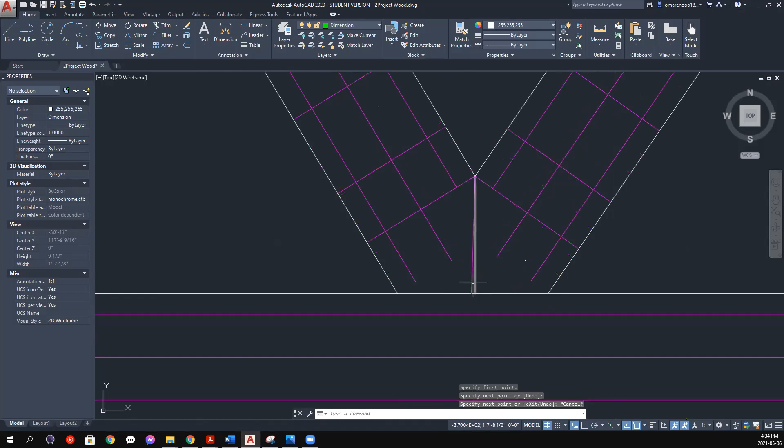Exactly. You're allowed to do both. You don't have to miter them, you can do both. In other words, some people like to miter their joints, and some people just leave the wood straight. It doesn't matter, Adriano. Okay, I got it now. They're both correct, you understand? It's the both way correct. The drawing's different - some people will miter the joints and put them all together, and other people will just leave them at 90 degrees. Okay, quick, so that's why we won't have a 90-degree angle because we.

In other words, what you're saying is that you left yours straight like that, right? No, it's exactly the same way like Omar has it right now. Exactly like this. I have it. Okay, so I thought it was wrong or something. Okay, never mind then, it's like I said. Oops, sorry.

I think some people miter the joints on the trusses, and some people leave the lumber coming at 90 degrees. They're both correct. But does it matter in the future? Which one is better to do? Well, mitering is a little bit better, but it takes more work.

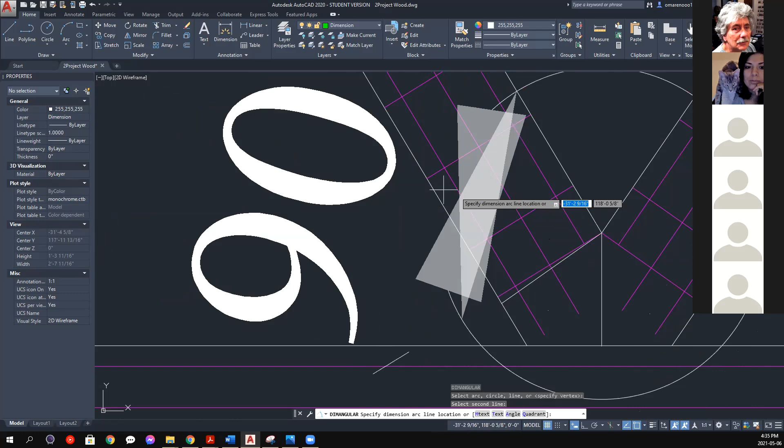The other way has to cut for sure right angles, yeah for sure. So mitering is a little bit better, this way you're not relying totally on the gusset plate. Sometimes when they butt together, they might help each other transfer some of the stuff. But the reason why they don't miter them is because sometimes the guy can't even calculate the angle. You have to calculate the angle to miter those things together. Mind you, with AutoCAD, you can have AutoCAD give you the angle.

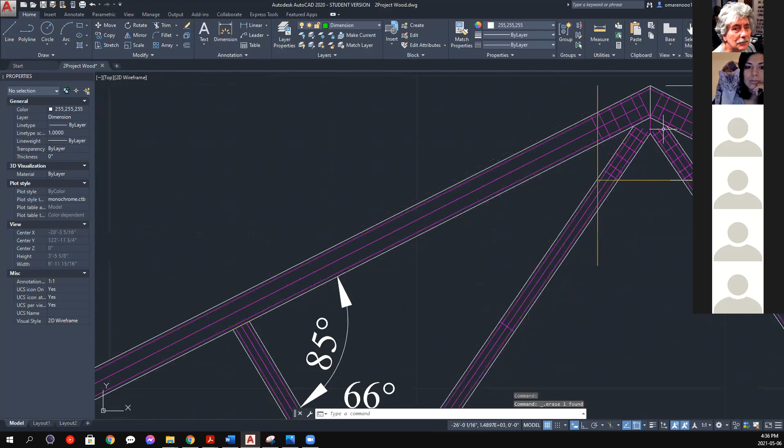So Omar, do you understand how you draw a line perpendicular to whatever it is? So you take the closest edge distance, you draw a line perpendicular to the other side, and bang, off you go. No, I have them, I just was making sure.

Okay, and one other thing, when we start here, perfect. You see here's one of your end distances, can you see my pointer here? No, see, okay, where is it? Because I have to share, you have to request remote control. Okay, approve, go ahead. Okay, you're gonna have to zoom in. See here? Oh sorry, let me go back, I want to pan down.

See here, this is perfect. You started here, you drew a line perpendicular, and then you got your end distance, then you got your distance in for your A value. Perfect, you understand? Don't even worry what happens in here, who cares, you understand? Okay, you follow what I'm saying? This gusset plate would be the minimum. I can extend it a little bit just to make sure.

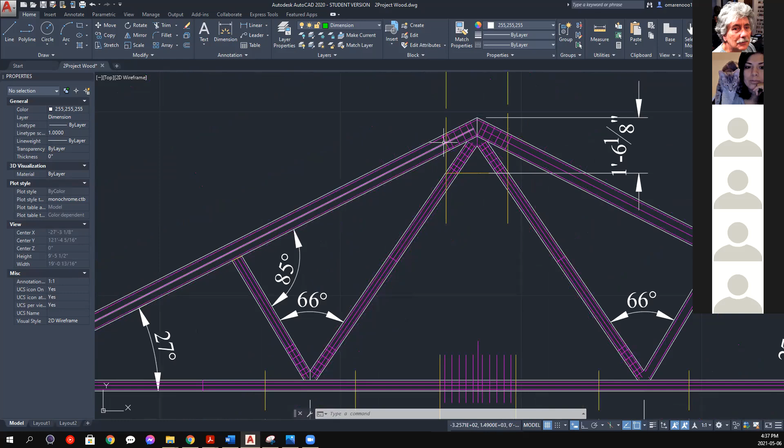Well, if I come to what you're doing now, right? Now I'm gonna draw over it, okay. So if you want to get really nice, Omar, be creative. Hold on, what I mean by creative, where's the annotate?

So what you're saying is that this is the edge distance, to keep that from there to there, right? You understand, you follow what I'm saying? From here to here is your edge distance, from there to there, from the last nail you're going to be putting here in your joint.

Agreed? So here, once you make a gusset plate like this, go straight up, go like this, do the same thing on the other side, go straight across, and isn't that a nice gusset plate? I mean, okay, it would be nice here, but when they actually go cut it, the guy, when they cut it, it's gonna be harder for them.

Anyways, yeah, okay, that makes sense. So what you're saying, it would be easier for the guy just to do this. That's what you're saying, right? Exactly, do it exactly like that. Omar, they're both good, you understand? As a matter of fact, you're right, this would be a little bit easier for the guy to do it. So do it this way.

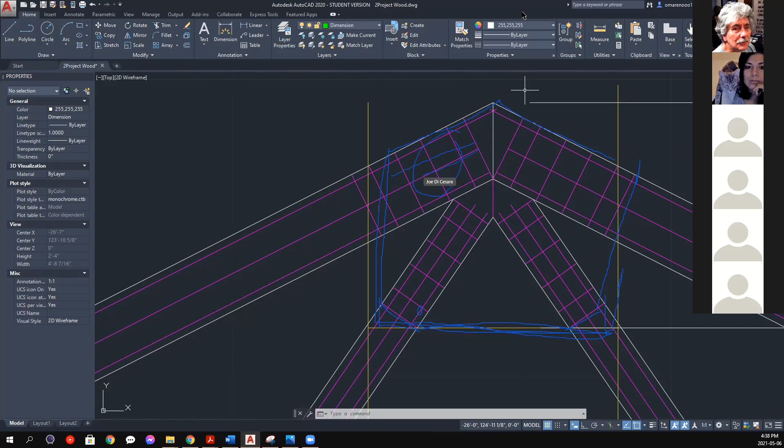That's good, you understand? Now up here, don't forget you have 2x6s, so there's a lot of rows you can put in here for the number of nails that you need. You understand? So I don't have to do... okay, do you understand? Because here you have a 2x6, you don't have a 2x4, so there's a lot of space up here. So I can add an extra row, so I don't have to go...

Exactly, okay, you understand? Because look, we said we needed 13, this is always going to be the minimum, right? 13, 13 for the edge distance, 26 in between, right? Remember, perpendicular to the grain, we need 26, we need 13 for the edge distance, right? So for example, if I have 1, 2...

Sorry, don't worry, here, I'm gonna go to my whiteboard so you guys can understand what I'm saying. Okay, I'm gonna drop out, yeah okay, so that's it. So for the top chord, you guys have all this liberty, you understand? Sorry, let me go to the whiteboard, and we'll do the math right now.

And I'm sure you can put 4 rows. Okay, so here's my 2x6 like this, right? Well that's 140 millimeters, right? If I have to leave 13 there and 13 there, right? So 140 minus 26, how much is that?

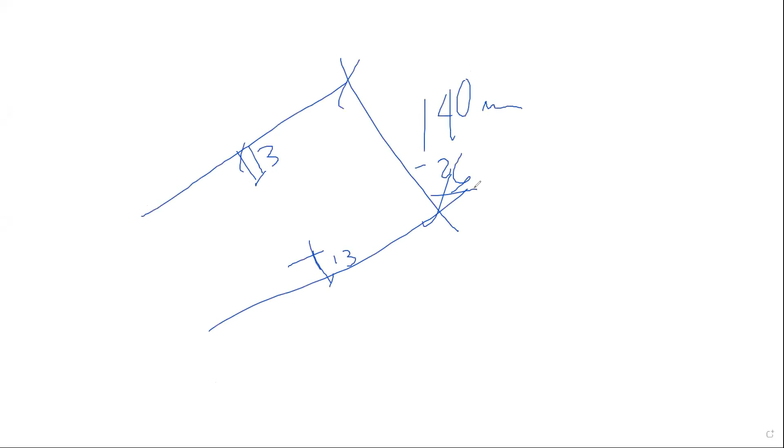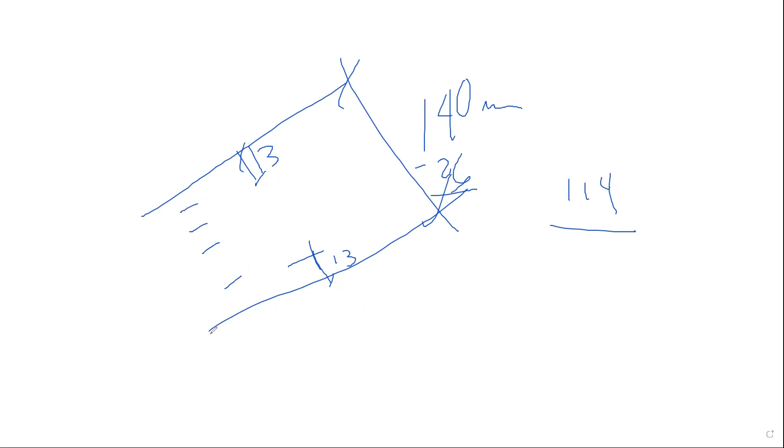Actually, you can put like 4 rows, but the thing is, I have 114, right? And if I divide that by 20... I think we need for that, yeah, I can put 4 rows if I want, Omar, easily. So that's why, up there, the carpenter has the flexibility of putting 4 rows. You don't have to worry about going all the way out there. There's enough space in there to put the number of nails that you need.

Okay, I get it. Thank you very much. As long as you get it, that's what I care about. And this way, if somebody doesn't get it, they'll say, hey Omar, what did you get? And you'll be able to explain it to them. That'll save me the trouble of having to explain it again. Thank you, Omar.

I'm telling you guys, I'm happy that the gusset plate is the last thing we do in the project, because I find that becomes, in theory, one of the more tedious parts of the whole project. You understand the concept of spacing, having to do the drawing and all that. And I'm glad that's at the very end.

We can resolve whatever issues you might have, but it's really not that complicated if you understand what those distances represent. If you can maintain those distances on your AutoCAD drawing, it's very easy to establish the size of the gusset plates. So the thing is to be able to relate to what is required and transfer that onto your AutoCAD drawing, so AutoCAD can do the calculation for you. Whereas Nermin did the whole thing manually, and she had all the good information to simply put that one dimension right away and finish her gusset plate. And now she knows how to do it, and I was aiming for extra points or marks.

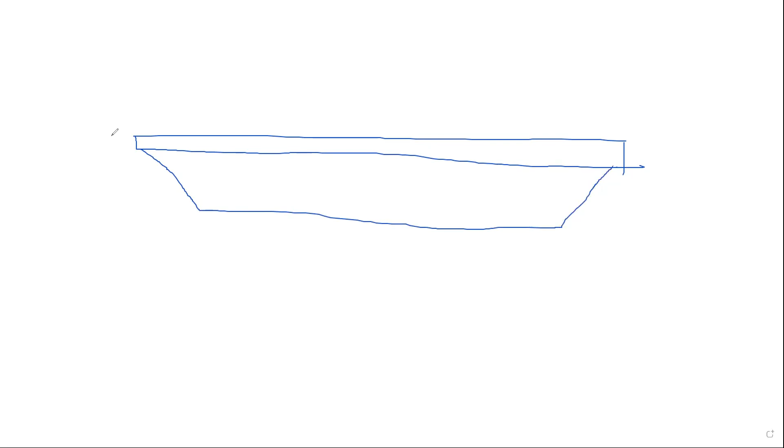Let me give you a simple example. First time I looked at open web steel joists being supported here on a beam, I asked myself, why is there so little steel here and why is there so much steel there? I just couldn't understand that whole concept. But then when you realize that here the only thing you have is shear, and here you have your bending moment, and you start understanding how the forces affect this member, you can start relating to why it was designed that way - why here you only need steel for one force, and here you need steel for another type of force.

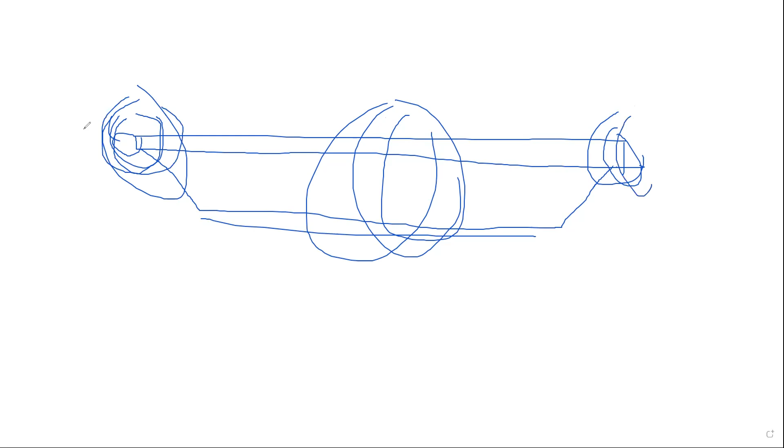The first time I saw this, I was questioning why do they build like that. Then as you understand forces, and what it takes to resist - here you only need enough steel to resist the shear, and here what you need is - I understood that the further the chords were, the stronger the bending resistance was. It didn't happen the first time. It slowly came together, one piece at a time, and everything started to fall together, guys.

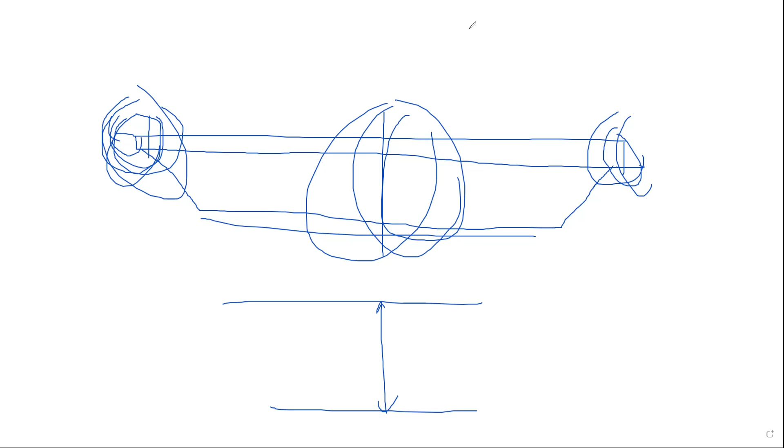So it's like anything. There's a lot of things you've learned in this program that you just remembered for the test, got it right, but don't really understand it. One day you're going to be on a job site and see it again, and from a different perspective, it's all going to come together. It's like when you learned 2 + 2 equals 4, and you said to yourself, what? That's exactly what's happening many times. But eventually this 2 + 2 equals 4 will apply to everything you've learned.

So just don't give up. That's all I can say.

Sorry about that. Can I just show you my screen again? I'm just not sure. Sure, go ahead. Right, go ahead. Yeah, go ahead.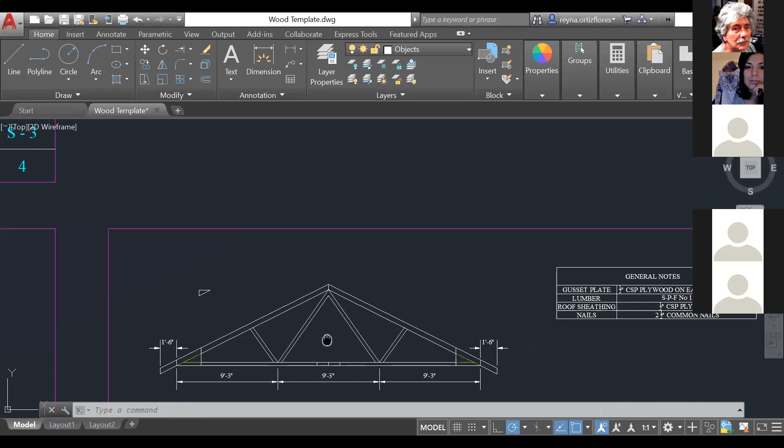Is this correct? Like, this is the top of the truss - is that how it's supposed to look? As a matter of fact, what some people will do - can I draw on your thing? Let's say, where these two pieces are touching here, if this is where they would touch, they wouldn't even bother doing that. They would just leave them like this, and let the gusset plate do the work of holding them all together.

If you're asking me what is the best way to minimize any secondary effects, that's what you should be asking me. The best way to minimize secondary effects in anything - let me just erase this and I'll show you. If you're asking me the best way to draw this - this is the centroid of this member here.

This is the centroid of that member there, and this is the centroid of that member there. The best thing is all these lines intersect all in the same spot. All the centroids intersect at the same spot. That is the best, Reyna.

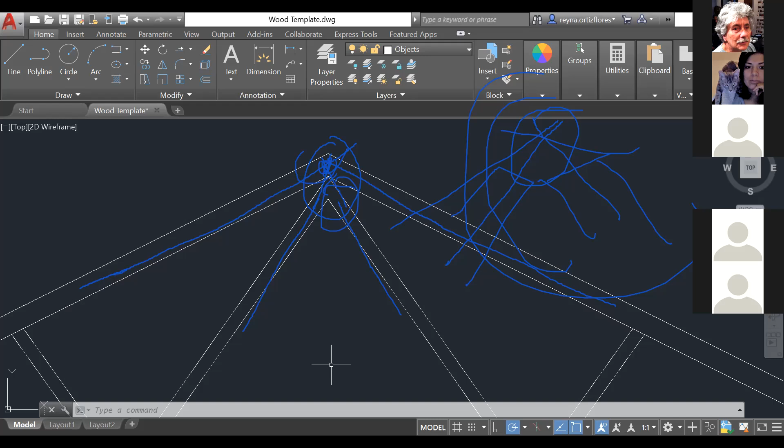You know open web steel joists, okay? The web members, the ones that have this type of web member in the open web steel joist, okay Reyna? What happened was, they were designed to the bone. Okay, they were designed to the bone.

In other words, no, I don't want to clear the drawing, I want to annotate. So this member here, believe it or not, them, okay, they were designed to the bone, and all of a sudden there was one roof that had collapsed. I wasn't involved in this, but this is something I read.

And what they found was, when the engineer designed the joist, what they found is that when you look at this member here and that member there, where these two intersected, right out here, and when they looked at the bottom chord, they completely excluded the eccentricity in their calculations, and that's what made the whole thing collapse.

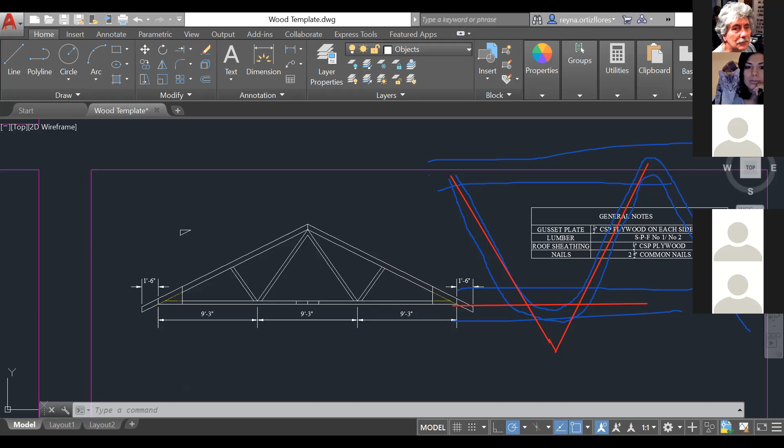Yeah, thank you. That would probably be the more precise way of doing it. But these things, if you make sure you put 3 extra nails in your gusset plates, and if I end up with 21 nails and see that I can put 3 more, I'll put 3 more. Like I told you guys, when they revamped the whole nailing thing, all the trusses that I modified, if I go according to the new requirements of nailing, I only got half the nails out there. And that to me is very scary, understand? But yet I followed it to the T, and then some - I added a few more, but so far so good, nothing happened. When I saw the new way of calculating the nail requirements, I was only allowed 1 shear plane, not 2. In theory, I had half the nails according to the new way of calculating things. And even if something would happen, yes, they would say that at the time that's the way you did it, but they wouldn't exonerate me if something happens. It was up to me to decide whether or not that was sufficient.

Okay, does anybody else have any questions? Yes, sir, I have a question. Go ahead. I'm going to share my screen again, one second.

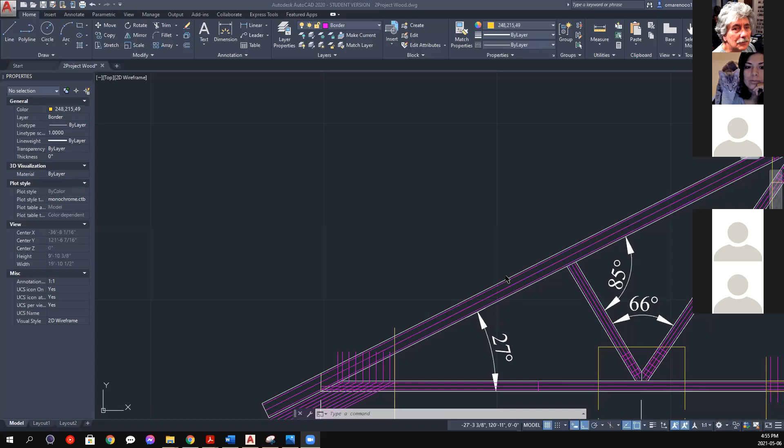So this one is giving me trouble. I don't know how to start this gusset plate here - from where do I offset? It's very simple. Can I annotate? Okay, start here, and draw a line perpendicular to there. Then offset your end distance, then offset your A distance, then offset your end distance, and that's where your gusset plate is going to stop. You see, in other words, if you want, you can start from here and draw a line perpendicular to there. It's up to you, Omar, you understand?

So what about the nailing on here, on this member? Do I offset it? How exactly do I offset it? Let's say I have 11 nails - do I put exactly the same number? You have 11 nails up there, that means you have 11 nails here. No, let me see, they're the same. They should be the same. They're the same, yeah they are. They have to be the same, because the only reason why you put 11 nails is because you have 11 nails there.

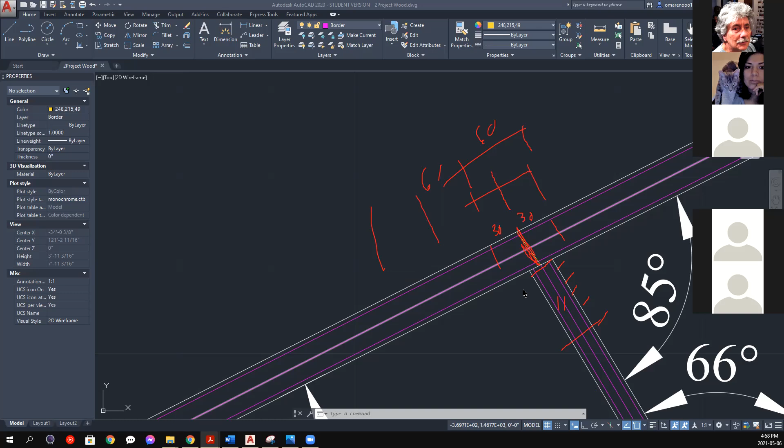Okay, so what you do here, for example, see where this member is in the middle here, right? Yeah. So now don't forget, this is like for example - from there, that's the middle of that member, right? Okay, so put 30 on this side and put 30 on that side, millimeters, I don't know what it is in inches. Then after that, 60 and 60, and work your way that way until you have your 11 nails. Just don't mind me asking, why 30? It's because you need, right now you need 60, right? Isn't it 40 though? I'm sorry, the edge - no, what I'm saying is that you need 60 between your nails, right? Yeah, exactly, so I'm splitting that equally on both sides. So this way I'll end up having 60 there, and then I have my 60, you understand? Because you're going to be putting the equal number of nails on that side as you will have on that side.

But my question is, do you put 11 on either side, or just 11? 11 total. Because here you don't have a joint. The only time you have to put the number of nails on one side - do you have any joints in here, Omar? No, it's only at the bottom. Okay, yeah, I get it - the joint is right there, you see, there's your joint right here. So that's why you need 11 there and 11 there. Okay, I got it. Now you got it. Thank you. Do you understand why, how you asked me how would I do it here? I would start from here and understand.

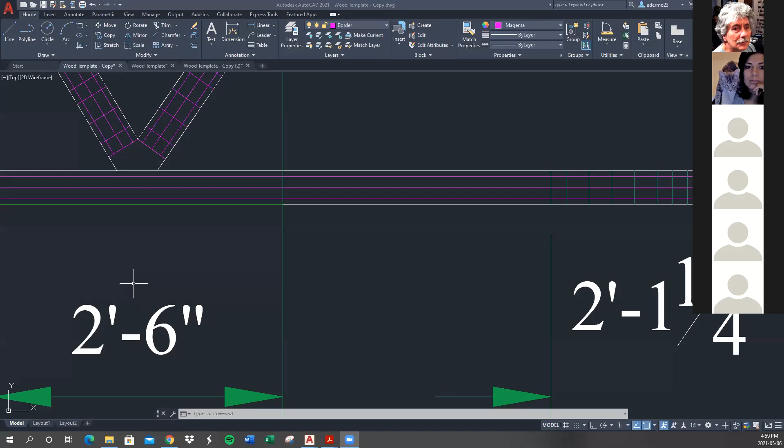So in this joint here, like for the gusset plate on this, you're splitting it evenly on both sides, right? Well, what I'm doing is, for example, this one, you have to add the sum of these two, have to go here. So whatever number you have on these two, this one has to have the sum of these two, because this has to be able to resist these two forces.

Wait, so are you annotating? No, I'm not annotating, but I will if you want, hold on a second. Yeah, I wasn't sure where you were pointing. Yeah, let me annotate. So on this member here, I need to have the sum of this one and this one. Okay, do you understand?

So hypothetically, I don't know how many, like he said he had 11 nails there. So I'm assuming you have 11 there and about 12 there, right? I'm just looking at my paper, I don't know, I'm just guessing.

I got 12 and 13 for the 3 and 4. Exactly, sir, exactly, I have exactly the same amount of nails. 11 and 12, or 12 or 13. Is that it? I have 15 and 11 nails. 15 here and 11 there? Yeah, 15. I got 12 and 14. 12 and 14. Well, you're supposed to all have the same number of forces.

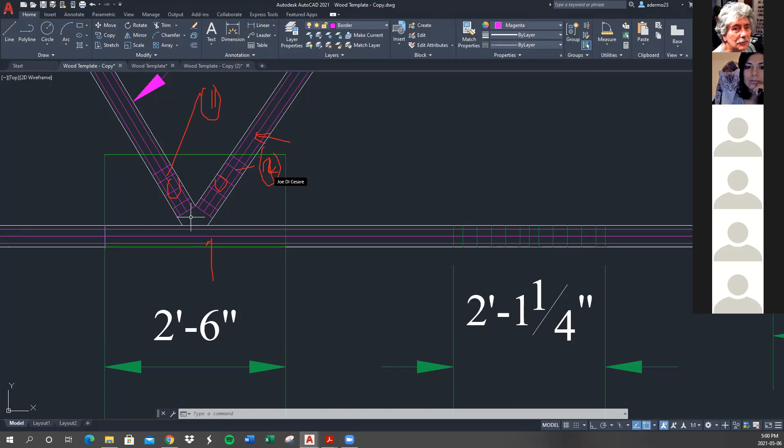We're all supposed to have the same number, the NR value is supposed to be exactly the same for everybody. I got the same as Adriano. Okay, so all I'm saying is that in theory we should all have the same number of nails. And like you said, sir, it gave me for my joint 5, let's say, 26 in total. It gave me the exact total I needed. 26, 11 and 14, is that it? Well, 15, yeah, 11 and 15 for me. So you got 26, and you got 11 and 14.

So okay, let's say there's 26 nails in here, is that what you're saying? Yeah. Okay, so what you should do is, so 26, it's up to you. For example, you can start right down the middle and put them evenly on each side, or it's up to you. You understand? To me it's easier, like if I'm going to start down the middle, I can split half and half, you understand, and see where I end up, and then see if it makes sense.

You understand, because I was putting 2 of them, so that's why. Okay, makes sense now, you see? So that, you know, therefore, now do you want to... to me I'd rather try to split them evenly on each side of this line. So instead of starting right down the middle here, it's just a question of it, you might start by having your first 3 nails here and then putting your next, and see if that works out. You understand? Okay, yeah, thank you, sir.

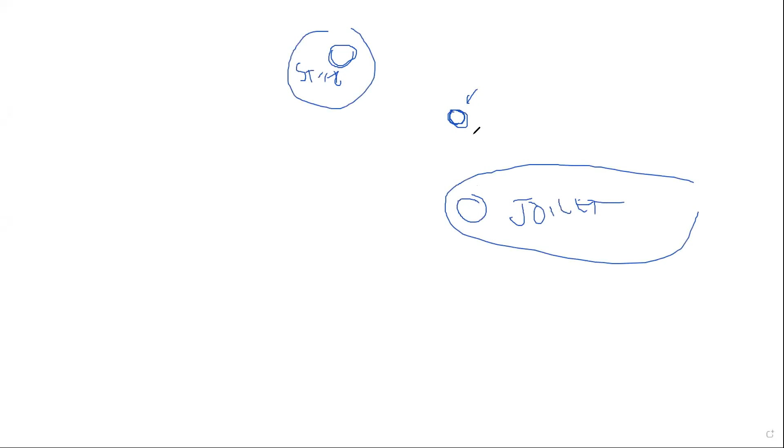I think Saint Agathe was over here. So what the engineer did is he went to get the values from Joliette, then from Sainte-Agathe, and said, well, it's about halfway across. So he took the average of what he found in Joliet and Saint Agathe, and that's what he used as his snow loads.

Well, this is in a mountainous region, and the snow loads were almost twice what he assumed. But if he'd had this chart, he would have had the right values right away, because that town was already listed. So don't interpolate climatic information, because when there are mountains, it affects the values.

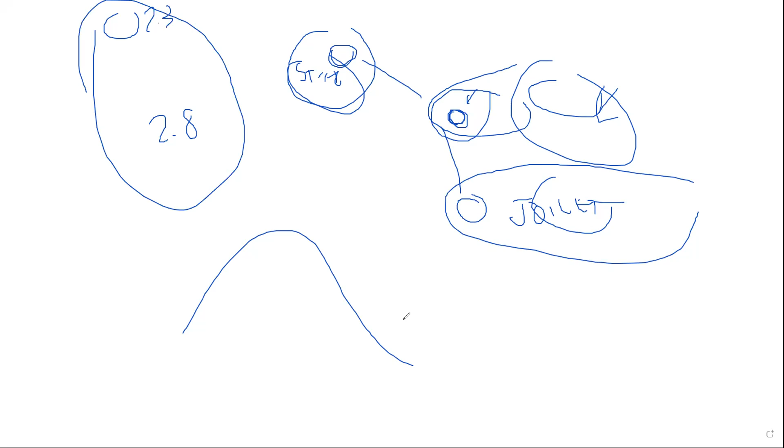Just look at Montreal. Look at Outremont, and the snow load there is 2.8, then go look at Sainte-Anne-de-Bellevue, it's down to 2.3. So even within Montreal, look at the difference in snow loads. Don't ever interpolate the climatic information in the National Building Code — try to find what it actually is. What I like about that one chart is it has a lot more cities than you'll find in the National Building Code.

So guys, I enjoyed this lab. I'm glad you had a lot of questions and made my time a little more interesting. Does anybody have anything else to say, or do you want to call it a day?

Sir, yes? Question about steel. Okay, so it's basically about the girder connection with the column — the double angle connection with the column, yes.

So my question is, let's say a column — the column flange width I chose is 200 by 31, and the width I checked on the W shapes is 134 millimeters. And the Gerber girder beam, its width is 179. So clearly it's overlapping — is that okay, or is it no good?

It's not overlapping. One is 134 and the other is 179. Look, it's not overlapping — let me show you what you're saying, and I'll show you why it's not. In plan view, here's my column like this, and you're saying this is 134. Here's my Gerber girder, and you're saying this is 179. So what does this have to do with this?

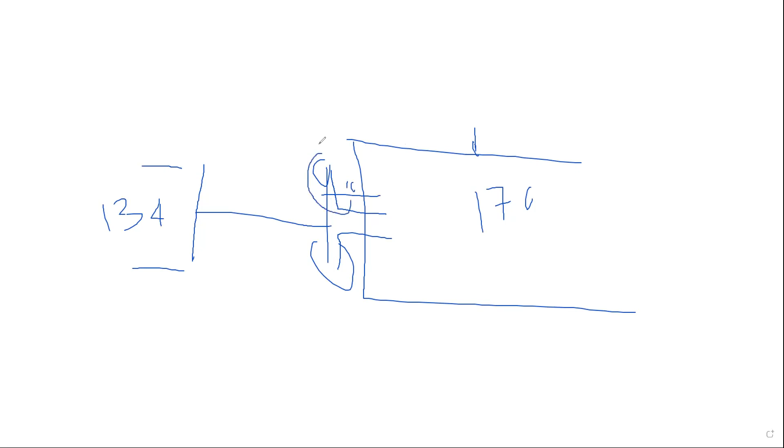Okay, so what you have to worry about is making sure that when you put your angles here, don't use a 76 by 76, because 76 times 2 is 152, and you only have 134. So that's not going to work. Do you understand what I'm saying?

Yeah, so you should worry about the angles here. Here you can use 76 or whatever you want — that's okay. But when you're welding it to the column here, you're going to have to make sure you use something smaller, like 52. That's what you should worry about.

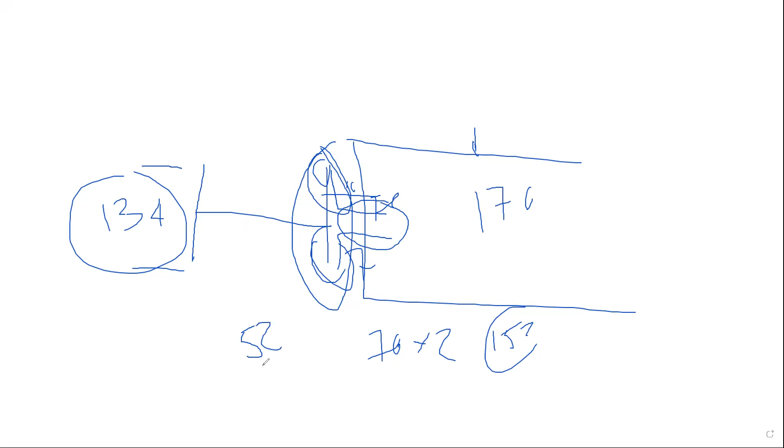So I have to tweak my design a little bit, because I picked 2L 76 by 76 — that won't work, and I would mark that wrong. But this, it is what it is — it will not create any constraints for your connection. This will create a constraint, so that's why you have to worry about those two angles there.

That's the W610 by 92. Let me look. 100, 610, 92, all the way down. Okay, let me zoom out a bit.

So that's the small W, the web, that is 10.9. Exactly, so 11 millimeters, add 2 more millimeters. Okay, that's 13, that's 13 plus 104, that's 117, so it's good.

It works. No, you still have to worry about the size of your welds now. For example, because you haven't added the welds yet, you understand? Okay, so let's say you're using 6 millimeter welds, times two welds. Okay, that's 139... well, 129, sorry. So if you don't go over 6 millimeter welds, it might work. You understand? Okay, but my welds, I think they look correctly.

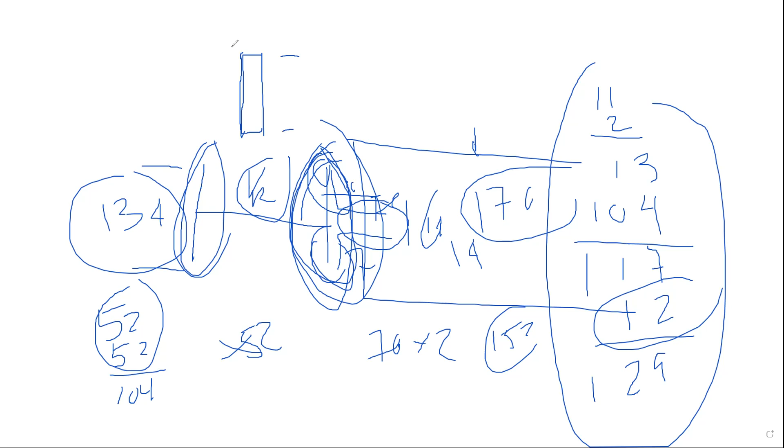So as these things get shorter, they get a little bit stronger. And I'm not constricted to choose equal angles, I can pick unequal angles. You can take unequal angles, and even if you take unequal angles and can't find one that fits your geometry, you can always tell the guy to cut it. It's just if you want to avoid having to cut them, you're better off, it's a little bit cheaper. And remember, if you take unequal angles and you're cutting it, you don't have that fillet anymore. So by cutting it, you're getting rid of that fillet, so now you got the full height to be able to put your weld if you want to.

Okay, all right, I understand, that's clarifying things. So you understand why in plan view, the width of the flange of the W610 by 92 has nothing to do with the column? Now I understand, yeah, you see that? Okay, yes sir. Okay good, all right good, thank you sir. You're welcome.